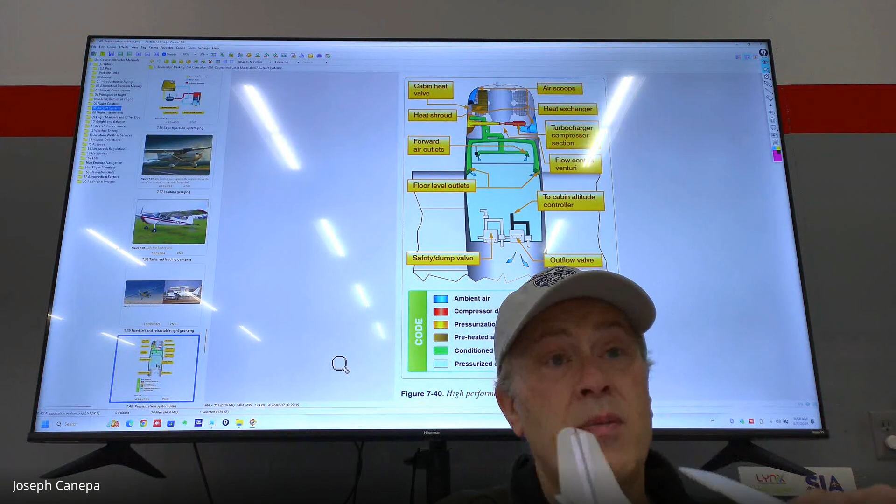Let's talk about aircraft pressurization systems. This is on page 735. We pressurize aircraft cabins because -- anybody know why we would have to pressurize an aircraft cabin? Yeah, do you know about what that level is? Yeah, it's around 13,000 feet, somewhere in that area. You really want to provide oxygen at about 15,000 feet. And in that case, if you can pressurize the aircraft, that would solve that issue there.

But pressurization systems, basically what they do is, first off, the aircraft cabin itself has to be completely sealed up, so there can't be any leaks in it. That's one thing about a pressurized aircraft. Second, you have to have some way of pressurizing or adding air pressure into that system, because when you're flying at 20,000 feet, all of the air in the cabin wants to escape, right? So we have to seal it off. We have to put pressure into it because we've got less out there.

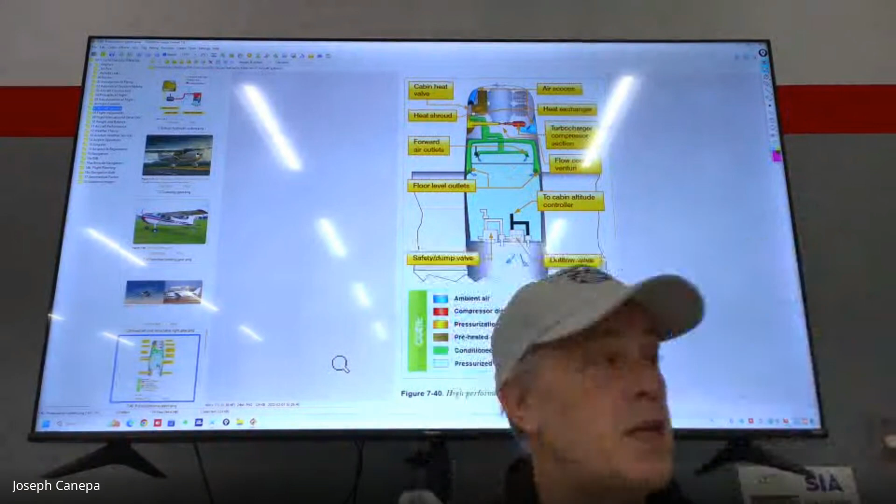Do we have high pressure on the aircraft at 20,000 feet or lower pressure? Yeah, it'd be much lower, right? So when you have lower pressure at that altitude, we need to pump lots of pressure in to make it feel in the aircraft like we're flying at maybe 8,000 or 10,000 feet, something like that. Most commercial airliners pressurize their cabins for around 8,000 to 10,000 feet, so when you go on a pressurized aircraft, you're going to feel that. For general aviation aircraft, they may allow you to pressurize it up to as high as 12,000 or so, but commercial airliners are all around that 8,000 to 10,000 feet.

So they've got just a couple of these, and I don't know if you're going to see much of this on the test, but I do want to go over it.

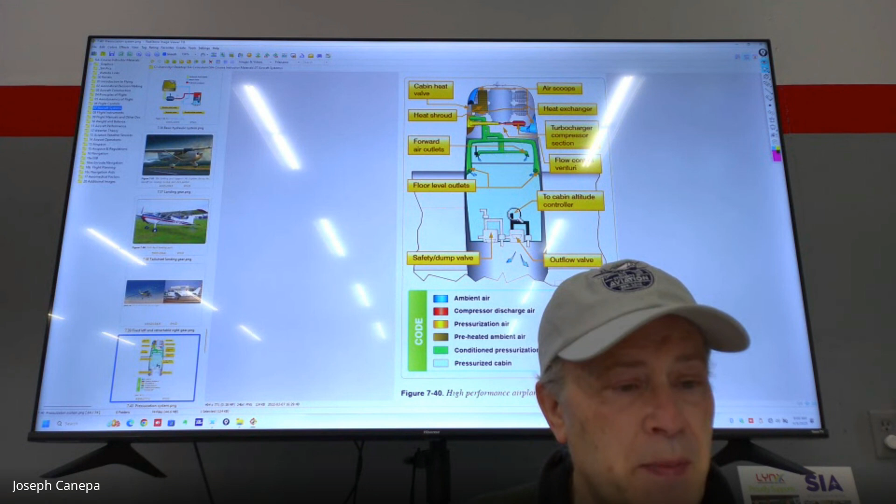Ambient air is the outside air pressure, the pressure around the outside of the aircraft. And then you've got your pressurized cabin, again like a capsule sealed. You've got a controller that allows you to meter the amount of air blowing in from a unit in the engine housing that basically pressurizes the cabin, typically off a turbocharger or something like that. It pumps air into the cabin to pressurize it, and then you'll have safety dump valves and outflow valves that regulate the amount of pressure.

So typically what you're going to see, I think they've got a diagram here. Let me just see if I can find it. Yeah, here we go, this is it right here. You can set the rate of climb of the pressure inside the cabin. Usually there's a setting, you can set it for 500 feet per minute. We know what a vertical speed indicator is, right? We've all seen that, and that just tells us the rate of climb.

Typically, most people are not going to notice a 500 foot per minute climb or descent, that's a pretty shallow climb. So in the cabin, when we set our pressure, we're going to probably set it between 500 and 1,000, so your ears can kind of adjust to it.

If you fly with a cold or have some sort of sinus infection, you're going to be much more susceptible to pressure changes. That's why you hear a lot of times when you're flying on the airlines, people saying, 'Oh, there's a baby next to me, and it was just bawling the whole time.' Well, babies haven't developed their sinuses well enough, and so for them it's like a balloon expanding as they go into an aircraft. Sometimes if they're congested, it'll just expand and cause pain, and they might cry.

So if you do hear a baby crying, one of the things you can tell them to do, if it's a young child—and a lot of young children have this too—is to pull their face back like this or tug on their ears like that. That can kind of loosen up some of the sinus cavities and allow it to equalize the pressure. Usually after 10, 15, 20 minutes the pressure subsides because some of that air leaks out of their sinuses. It's not so bad, but it is painful.

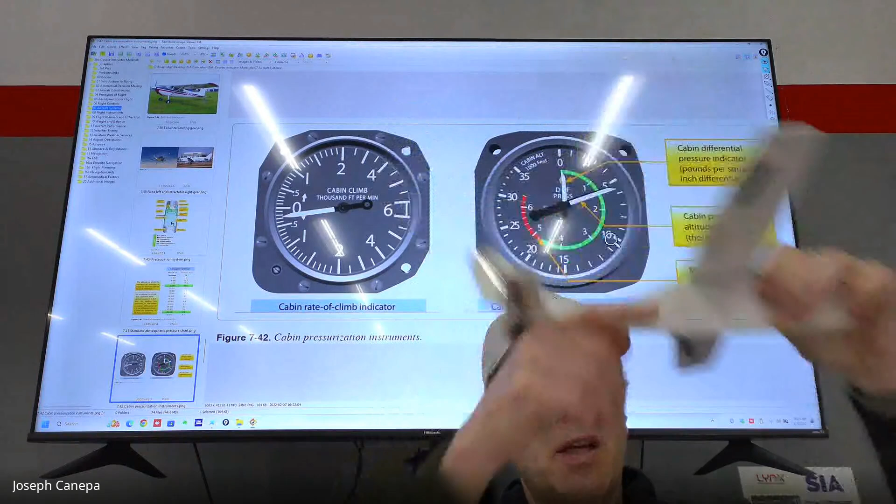So the differential pressure max that this aircraft can handle is around 4.8, so 4,800. That little dial, that needle right there, is just going to move and tell you the differential. So we really can't take this much beyond that, and that has to do with the aircraft.

Now, oxygen systems take oxygen from typically an oxygen tank, and they deliver it to the pilot through either a nose cannula or a mask or something like that. So this would be an oxygen flow regulator or whatever, and you could turn these on, activate them.

This would be useful up to maybe like 26,000 feet. Much beyond that, you really need to have forced air into your lungs, because your lungs aren't strong enough to draw in oxygen, even though it's being supplied to you. You can't inhale because there's just not enough strength in your lungs to draw it in. So it has to be forced in.

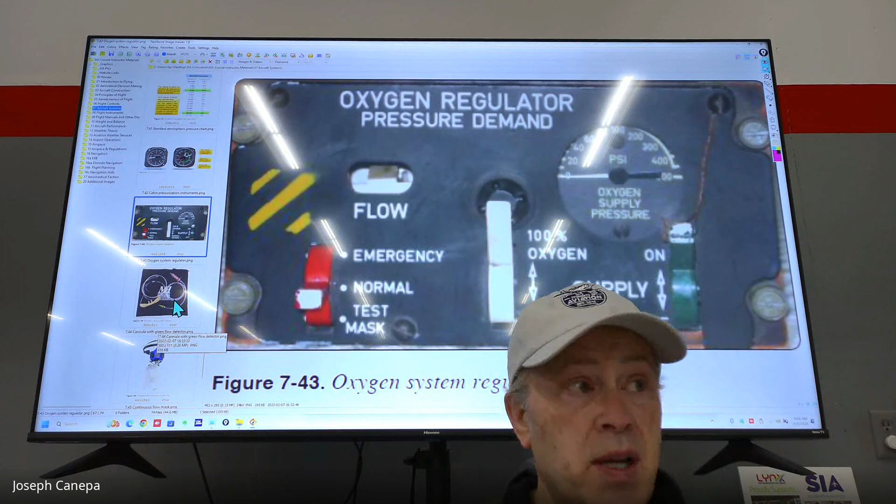We just breathe in. But a good point to make here is that the higher you fly, the less oxygen is available, right? It's just harder. You're not getting the oxygen into your system. There may be oxygen up there, but you're not getting it into your system because you're not breathing in deep enough.

So you really notice it at night. If you take a hit of oxygen at night, you'll notice right off the bat that everything becomes brighter. Oxygen affects our performance, it also affects our thought processes, things like our brain. Our brain doesn't have enough oxygen to operate at higher altitude. But at night you can really notice it when you take that hit of oxygen. You'll actually see everything just brighten up instantly, because the oxygen is getting into your bloodstream, it's getting to your eyes, and everything's performing a little better.

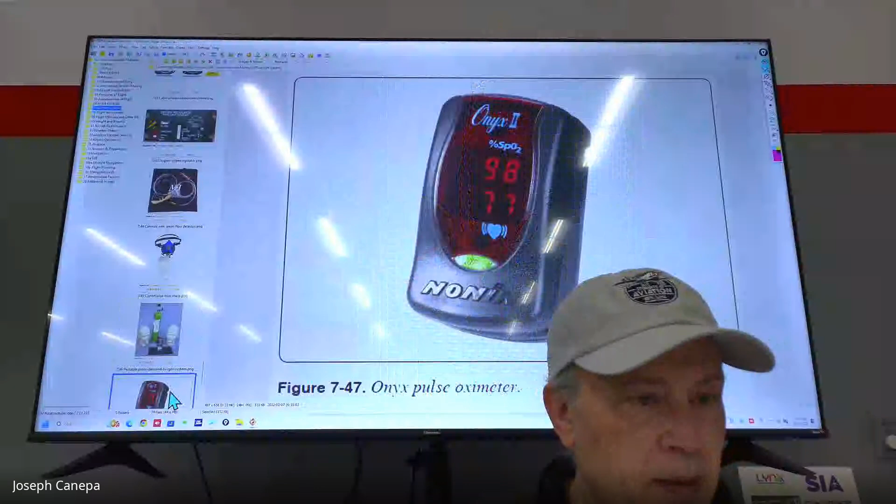It's a pulse oximeter. This just tells you how much your O2 is in your blood. These are dirt cheap, you can get them for like $10. Not a bad idea to have one of these in the aircraft.

What this is telling you is the oxygen in your blood. Right here, you've got the rating like 98, which is pretty good. If you get down to around 94, you're starting to get less oxygen. You can actually wear them on your finger, take it up to altitude, and actually see the oxygen drop in your bloodstream. It'll actually drop while you're flying, and then that's your heart rate right there. So again, that's a good thing to have.

There's several things we get into when we talk about aeromedical factors, we talk about this a bit more with carbon monoxide, how that prevents oxygen from getting into your system. As human beings we need oxygen to function, and there are several things that could prevent us from getting oxygen. One of them is carbon monoxide, another is not having enough air pressure or enough oxygen in the air. Those are all things that affect how we get oxygen in our system. If we don't have enough, we don't perform as well, we make poor decisions and things like that.

Okay, any questions on that?

So icing, types of de-icing systems here. There are several different types. I think we're going to page 7-40. You've got, this is a type of de-icing. So let's talk a little bit about the terms first. You've got anti-icing systems and you've got de-icing systems. Does anybody know the difference between de-icing and anti-icing?

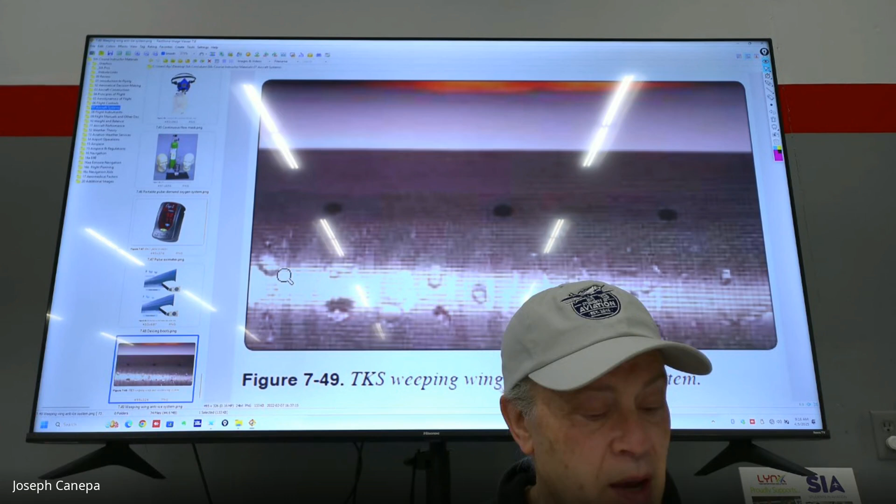They'll show frozen turkeys, or chickens or something like that. They fire them at a real high rate of speed into the turning turbines, and the turbines just slice them off. But they have to do that because obviously there are going to be bird strikes, and bird strikes can be devastating.

I think the Miracle on the Hudson, you guys remember that incident? That was a case where both engines were struck by birds, and they couldn't restart the engines in time, so they landed safely.

In those destructive tests, they have to make sure the casing contains the blades in there. Older aircraft didn't have some of those protections.

There was an incident, I don't know how many years ago, where a fan blade caused the engine to fail, and one of the turbine blades slung off the jet engine and punctured the fuselage, causing explosive decompression. I think a passenger was killed - they got sucked out or something like that. So yeah, it does happen.

With the newer engines now, they've got incredibly strong material around the engine. They've got these massive... I can't remember the name of the company. I think it was a European company that makes a gigantic engine. Gosh, I can't remember. What's that?

Rolls-Royce, that's it. They actually purposely let the fan blades, these large fan blades, depart from the hub itself, and the engine will destroy itself, but it'll keep it contained in the engine, just blow all the parts inside. So yeah, they're very strong, but it is a potential problem.

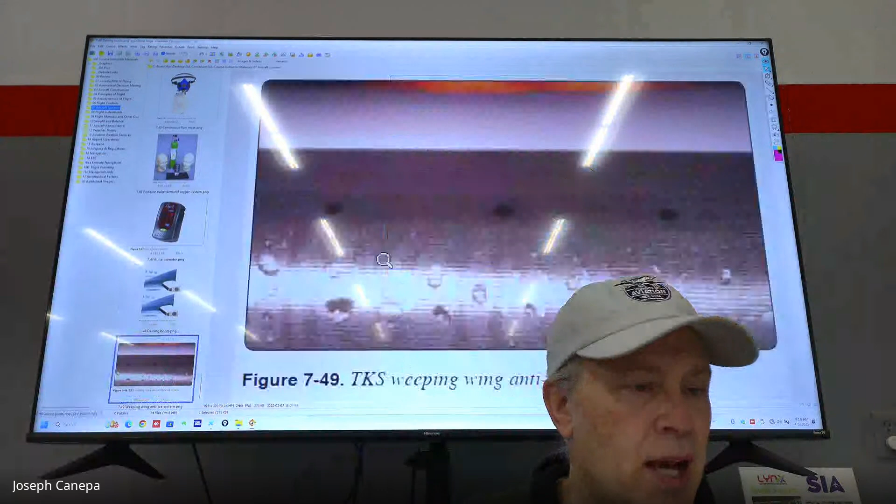You'll see this in a lot of smaller aircraft, like the Cirrus SR-22 has this. I don't know if it's an option or included with the aircraft, but you can turn these on and adjust the flow rate of the fluid.

Would this be a de-ice or anti-ice system? Anti-ice, yeah. That's also somewhat like the rest of it - that's another benefit. As it weeps out, it actually flows back across the wing. Its main purpose is really to prevent ice from forming.

There's pros and cons to each of these de-icing or anti-icing systems. The typical pros and cons for a bladder type system, where you turn on a pump and it inflates like this.

What can happen, and I don't know how much proof there is of this, but if you get ice that forms here and you turn it on, it may just push the ice far enough away from the wing but may not break off. That typically happens if you've got a very small layer of ice - it still stays attached to the leading edge, and then your icing system becomes useless because the rest of the ice is just going to form on there.

Again, I don't know how much proof exists of that, but it is a potential problem. These are also very high maintenance.

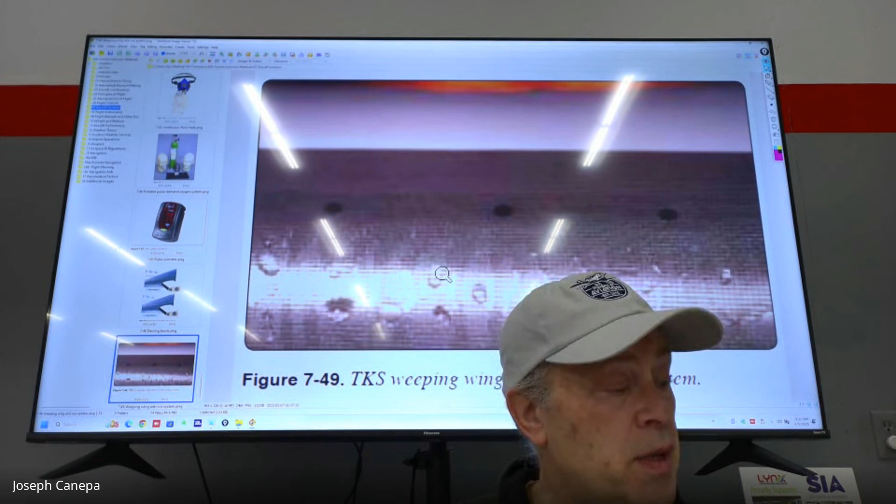The bottom line is, if you go up and fly and you don't have any kind of de-icing or anti-icing system, you need to stay away from ice. In weather reports, we'll find out if there's potential icing up at altitude, and if there is, it's a simple decision: you're not flying. It's very simple, you just don't fly if you don't have de-icing equipment. If you have de-icing equipment, it has to be certified to fly in those conditions that you're flying in.

So let's say it's light icing, like rime ice, which is kind of milky ice, and it isn't as bad as clear ice. Clear ice is literally that - it's just a solid layer of ice that forms. If there's clear ice up there, it forms fast and it's also very heavy. So if you have de-icing boots, you probably are not going to want to fly in clear ice unless you've got some sort of heated wings.

Jets have got it great because they duct heat from the jet engines to the leading edge of the wings, and it just blows out air and keeps the wings free from ice. They've got the best, but even those can be overwhelmed from time to time if you have extreme icing.

So, for the icing boots, why don't they inflate periodically? They can, yeah - on some systems they're automatic. They automatically will inflate periodically, they'll just inflate on their own. Most of the time, the pilot controls it - they hit a button and it cycles the boots. But on some systems you can set them up so that they do that automatically.

Another type of de-icing or anti-icing is the prop, and this is what's called a heated prop. Basically it's just a strip of rubber, and inside that rubber there's a bunch of heating elements. You can see here this is just at the root of the prop itself. We want to prevent ice from forming down here because, for one thing, there's a lot larger surface area there, so more area for the ice to stick to.

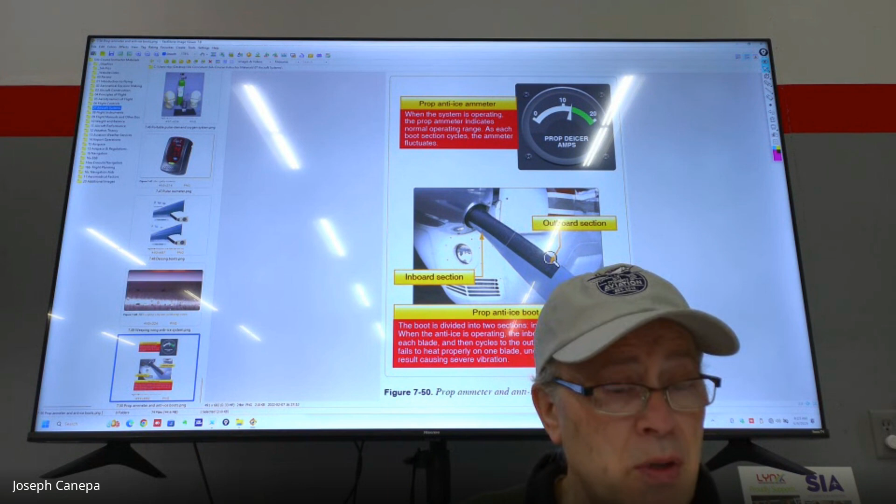As that ice breaks off, it kind of slings off the side, and it'll keep most of the ice off here. It's really hard for ice to form on this. It can form on the thinner portion of the blade, but that thick portion is really susceptible to ice, and that's why we have these little boots that cover the root portion of the prop. There's the root there, and this extends out to the prop itself. But these obviously are driven by your electrical system, so you have to have a really good alternator or generator to generate the amount of current to heat those elements.

Would the same force of the propeller just launch the ice off the blades? Not necessarily. I mean, if it's like clear ice, once it hits that, it's stuck to it really hard. Even rime ice can form on it - it's not as likely, but clear ice is very dangerous. And you can imagine this blade is turning at a pretty high speed, close to the speed of sound on the tips. So in a situation like that, you really don't have a lot of options. Having that heated blade is going to heat the blade further over, but it's really designed to get the ice off of that lower portion.

Follow up to that - if the heated part melts the ice, would that come off and hit the stuff towards the fuselage? So the question is, if you turn this on, what happens to the ice - does it sling off, does it hit the aircraft? The answer is it can hit the aircraft. I was flying on a twin a number of years ago, and we had some ice develop on one of the tips of the props. In a twin engine, the engines are right here and right here. Well, when that ice slings off those props, where is it going to hit? It's going to hit the fuselage, yeah.

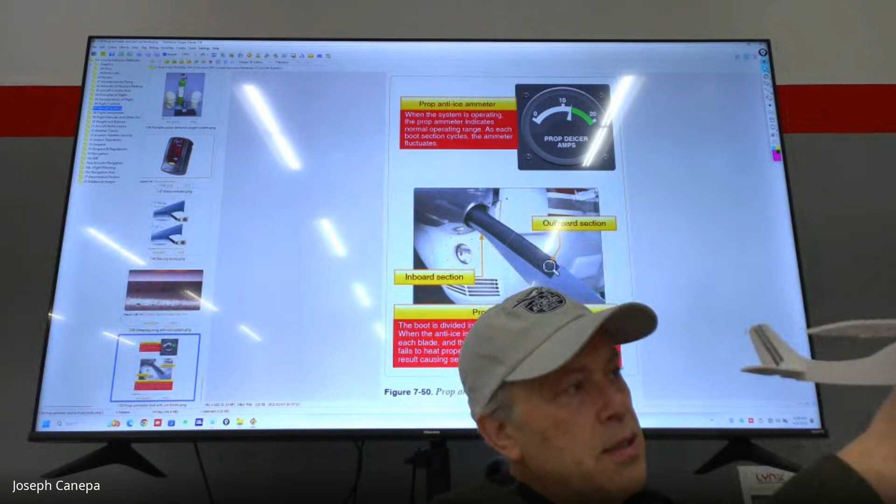Otherwise, on any twin, look roughly where the line of the prop is, the plane of rotation, and look at the fuselage. You'll actually see dents there if that aircraft has ever been in an icing situation, from the ice slinging off.

The question was, if you didn't have de-icing systems, can you get ice off the aircraft by shaking it? The answer is probably never. It's only possible if it's just about ready to fall off anyway. Keep in mind an aircraft traveling through the air at 100 miles an hour has a lot of pressure on the ice, and if it doesn't fall off at that speed, shaking the plane won't do it either. What may help is trying a side slip or forward slip.

I wouldn't recommend it, but you can try a side slip or forward slip and see if you can change the airflow, maybe pop some of the ice off. But if you're in that situation, it means you didn't plan enough ahead of time to stay out of the ice. If you're flying with someone else who made the poor decision to fly into ice and you don't have de-icing equipment, you can try anything at that point.

The general rule of thumb is if you get into ice, you need to either climb or descend by 4,000 feet. That will generally get you out of icing conditions, not always, but if you're at high altitude and can descend, you're descending into warmer air typically. The closer you get to the Earth, the warmer it is; the higher you go, less pressure, colder. That's just standard the way it works.

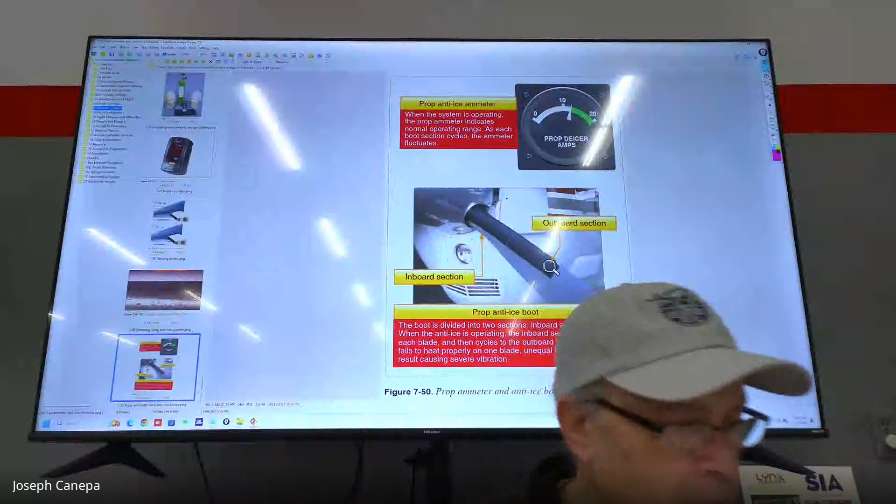Okay, any other questions on that? All right, let's move on to flight instruments. Let's see what we have for time here, okay, 9:30. All right, flight instruments. I think we've kind of reviewed some of this stuff already.

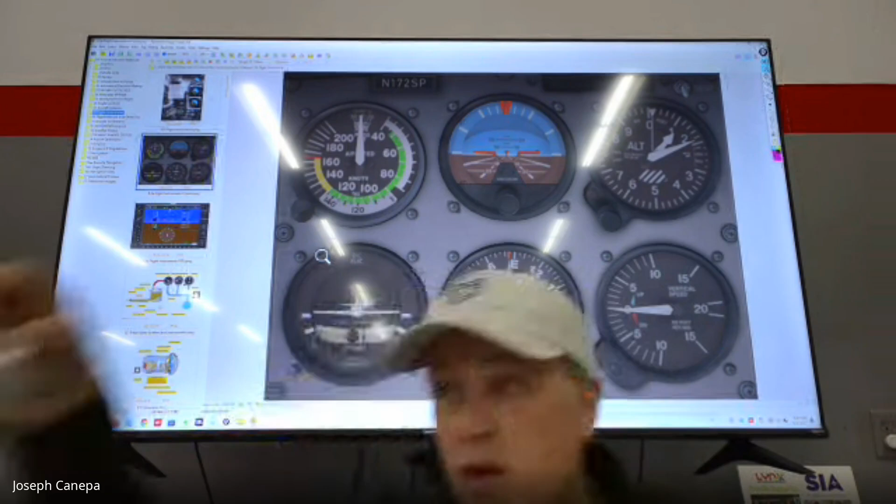It's beyond the scope of what you need to learn here. If you want to delve into gyroscopes, there's some really good videos on it. I don't know all the characteristics other than to tell you that if you spin it really fast, it wants to stay at that position. It really resists moving out of it. It's not just going to tip over. It stays up, just like those toy tops you had as a kid, that's how they function. You spin it and they stay upright. Then over time, due to friction, they'll start wobbling, caused by friction and precession.

So there's actually a car called the Gyro X that is on two wheels and uses a large gyroscope to keep it steady. And those walking things, the Segways, you guys ever seen those? Those use gyroscopes, and they're just two wheels. Hoverboards probably use gyroscopes too.

The more weight you have on a spinning gyroscope, the more stable it is. There's a design for a monowheel with two gyroscopes that would rotate, probably going against the turn, one side or the other. I think I've seen some of those monorails, basically two wheels on a rail with massive gyroscopes. The heavier the gyroscope, the more stable it's going to be. The faster a gyroscope spins, the more stable it's going to be as well.

This gets into areas that we don't need to discuss here, but if you want to delve into it, again, there are a lot of good YouTube videos.

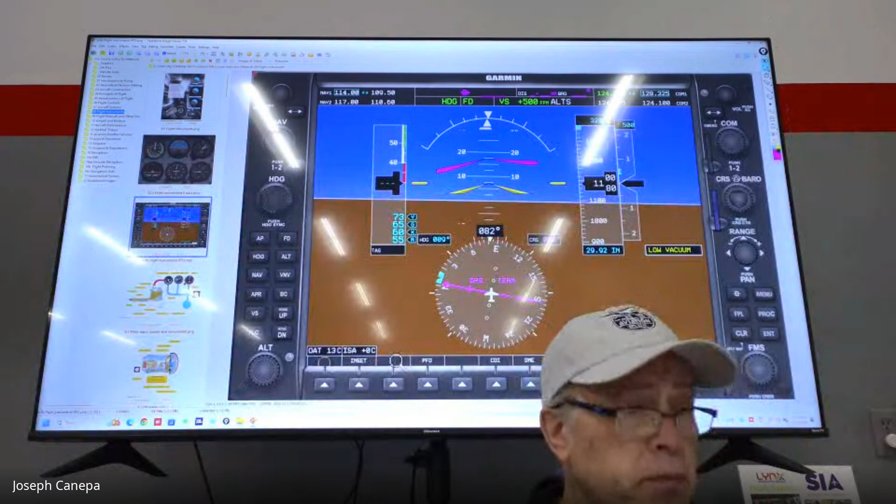All right, so let's talk about what drives those systems. So they both have the same inputs. They have static and dynamic air pressure that go into these. They may or may not have... we'll stay with that. So we've got the static and dynamic pressure that's pumped into the system, or actually brought into the system.

On aircraft, we have what's called, they're all going to have what's called a pitot tube. So let me just, let's see if I can do it. For example, let's make this.

So I don't know if I can, I'll try it like this. So right here, I'm just going to hold this like this, and I'm just going to blow on that. Watch what happens to that. Okay, that's a very simple airspeed indicator. If I blow on it for a long enough period of time, this will just stay up. So let's do it right here.

And you can see how it kind of pushed out like this as I blew on it. If you're flying through the air, this is obviously going to push back. If I'm going this direction right here, this is going to push back like this. And we kind of have a gauge. We can put like a sheet of paper behind it with graduations on it, and we have a rudimentary airspeed indicator. So this is dynamic pressure.

Again, this pitot tube is what captures the air. So what's happening here? This is pointed into the flight path right here, or on the leading edge of the wing. Let's see what here. I think, well, actually, let's go to our simulator here. This one.

We'll just go on the outside of the plane here and look at this. Is this a new simulator? I know this is X-Plane 12. It is the latest version of X-Plane 12, though.

Is this one on the other simulators? We use X-Plane 11 on the SIA sims. The big one in our office, the SIA office, is X-Plane 12. And yes, it's not as good as Microsoft Flight Simulator as far as graphics.

So I bet you we're floating. Let's see if I can take off here. Brakes. Yeah, I'm at full power. We're in the water here, so this is going to be interesting. There we go. Oh, maybe it is a float plane. I just want to get up in the air. Okay, so let's.

So it's in demo mode because I don't have an internet connection on here. If I had an internet connection, I could do this. Let's do this. And that one doesn't have, try this one again. Launches. Choose location here. Launch a passenger.

There's also what's known as an alternate static source. That might be something inside the aircraft, and it could be something as simple as, let's say you lose your static port and it becomes iced over, or a bug gets in there. It'd be unlikely in flight, but on the ground, dauber wasps sometimes will nest in those little holes - it's a perfect hole for a nest for them, and they'll cover that up. You should catch that during your pre-flight inspection. It's so important that it's on every checklist to check the static port and make sure that it's open.

But if that does get plugged up in flight, you can do another thing here - you could just break the glass on one of these instruments. You want to probably break the glass on the cheapest instrument. The altimeter, I would not want to break the glass on that one - it's very expensive, you're talking thousands of dollars for a good altimeter. The vertical speed indicator you can get for much less expensive than that. So if this got iced over and I was really in a dire situation, in the clouds, in ice, a situation I should not have gotten myself into, I would break the glass here, and now we've got static air pressure.

You're letting in just the atmospheric pressure. This will only work on a non-pressurized aircraft though. If you're in a pressurized aircraft, that's not going to do you any good, because the pressure in the aircraft is going to be different - it won't change it. So for small planes like this and that one behind us over there, those single engine general aviation airplanes, that would work.

Yeah, Danny. Sorry. Say it again.

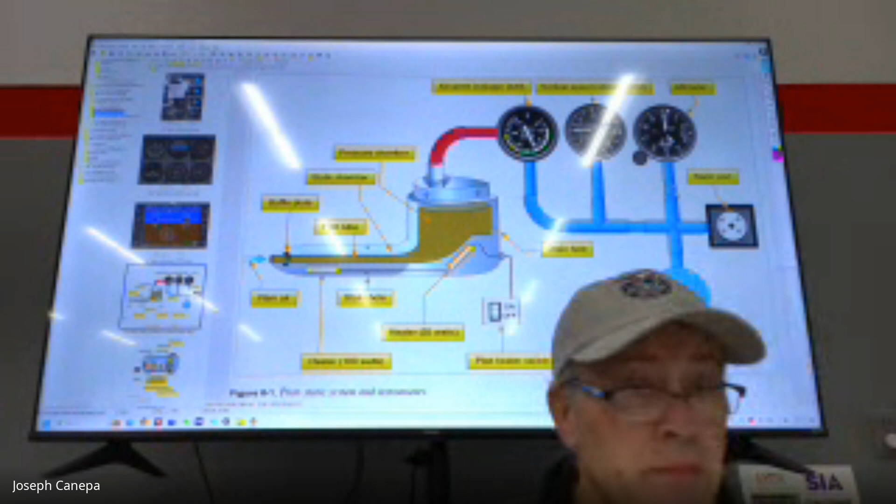Could that cause the static port to unclog due to the pressure? Well, you shouldn't have to, but I see what you're getting at, and it is possible that it could pop it out. It would be, because especially if you're in a pressurized aircraft, if you broke that, the pressure in the aircraft would try to escape through that static port if it's plumbed that way.

But it may not be plumbed - it may be an electronic instrument. Like most aircraft today, you can't, obviously with a TAA aircraft like this one, you can't break the screen, and that would be very expensive - we're talking tens of thousands of dollars. This only works for the older style gauges. So again, there's our vertical speed indicator - I would crack that glass if I had to. This probably won't be on the test, so we'll just move on here.

So this little piece is like a little plate, maybe an inch and a half in diameter, with a hole in the center of it. You can look on the aircraft - if you go out to the flight line, you'll see the port on some of these airplanes, you'll have to look for them. They typically look very similar to this right here, just this little thing that looks like a quarter with a little hole in the center of it. But they've got a strong plate around them.

That's a heater, and what that does is it heats up and melts off any ice or anything like that. When you get into icing conditions, you'll turn that on, and that'll prevent ice from forming in the system there.

Let's say you're in a really old aircraft and get stuck in icing conditions again, which you should never do, but something bizarre happens. Why don't planes have multiple static ports? Some of them do - airliners have at least 2, maybe 3 or 4 on the aircraft, and they'll have alternate static sources too. But most of the time general aviation will typically have just one static port.

Okay, the pitot heater - that's going to heat this tube right here. Again, ice can form on that tube, so you've got little heater elements. You turn this switch on and it warms that pitot tube up. It's so important that it's in every checklist - you have to turn on the pitot heater, and if you put your hand on that pitot tube, it gets really hot. You'll burn your hand on it if you're not careful.

In some aircraft, if you leave that on the ground on a warmer day, like over 40 or 50 degrees, you'll actually burn the heater out. So that's how strong they are - they're very powerful.

So let's see - yep, ram air, pitot heater switch. I think that's everything there.

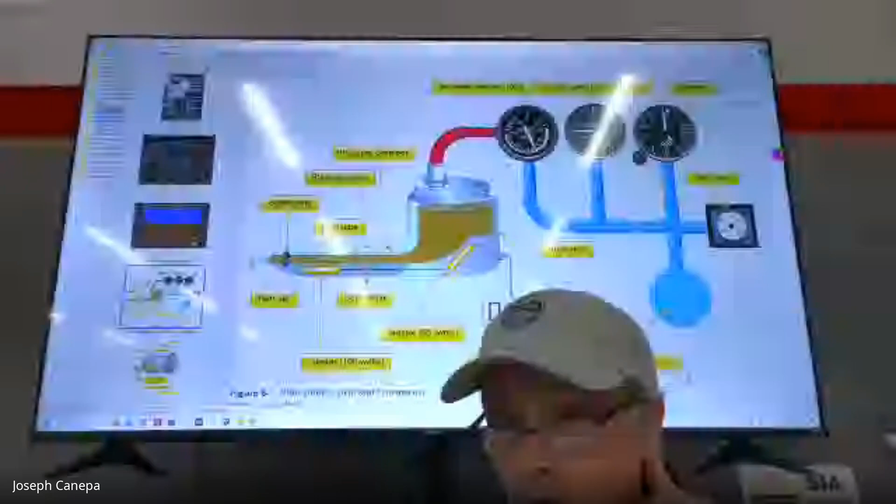So what's that - the drain hose? Yes, so the drain hole is there just to drain out water that gets into the pitot port. So if you get some ice in here, you turn on the pitot heat, it's going to melt the ice, and that's going to get sucked out from these static holes. If that gets blocked up, then your airspeed indicator is not going to show anything essentially.

Altimeter - so we go back to here's our diagram. There's our altimeter right there. It's driven off this blue stuff, which is all the static, what drives the static port. Notice that the airspeed indicator has both static air and dynamic, or ram pressure air, going to it, whereas vertical speed and altimeter have just static.

You will see that on the test - they're going to ask you about this. So static air pressure goes to just those two instruments, but ram air is going to the airspeed indicator too. So pitot feeds the airspeed indicator, and static feeds the airspeed indicator. These others are just static air pressure.

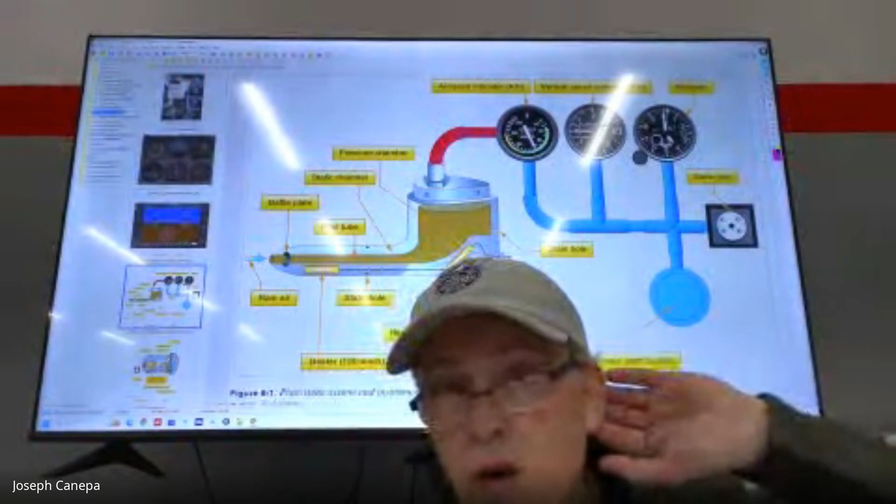No, they wouldn't be connected to a system at all. Yeah, and that would be you're thinking about the gyroscope, the vacuum gyroscopes. The vacuum systems typically drive the gyroscopes, they won't drive any of the flight instruments. These right here are strictly used outside - they use very little electricity, if any, other than for lighting and stuff like that.

Obviously on a TAA aircraft, these are going to be driven with little sensors, but they'll display that information on top. Okay, so let's go here - let's take a look at the inside of an altimeter. So the altimeter is, again, a very basic design.

These are aneroid wafers right here, and basically they're like a balloon, but a very sturdy balloon. It's sealed air - as the outside air pressure decreases, what do you think happens to the aneroid wafers? They're going to expand. Yeah, exactly. And as the air pressure increases, they're going to contract.

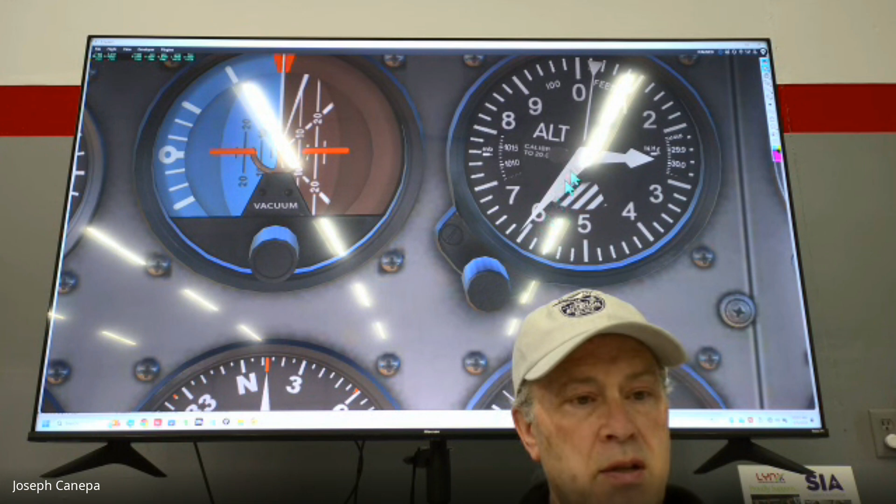Now, this right here is for 10,000 feet. So if we were at 12,600, where would this little needle be? What do you think? It'd be just past the 1. Yeah, because it's 10,000s. So again, this is hundreds of feet, thousands of feet, 10,000s of feet.

You will see this on a test as well. They're going to give you various altimeter diagrams and ask you what this altimeter is showing. One of them shows this over 10,000 feet, and the common mistake most pilots make when they take the test is they say 2,600 when really it's 12,600. So don't make that mistake, make sure you know how to read an altimeter.

Is there any aircraft out there with 100,000 feet? Unless it's a spacecraft, maybe the SR-71. It's possible. Again, for general aviation aircraft, it's not relevant. You're going to see this type of altimeter, this is the most common type you'll see in an aircraft.

Except general aviation aircraft, the vast majority of them are not. Small aircraft are typically going to stay below 10,000, but all of the general aviation planes I've ever flown are capable of flying over 10,000 feet. Is it practical? Probably not, because it's going to take forever to get up there. If you're doing a long cross-country flight, there may be benefits to climbing to that altitude. So it is possible that you'd go up there.

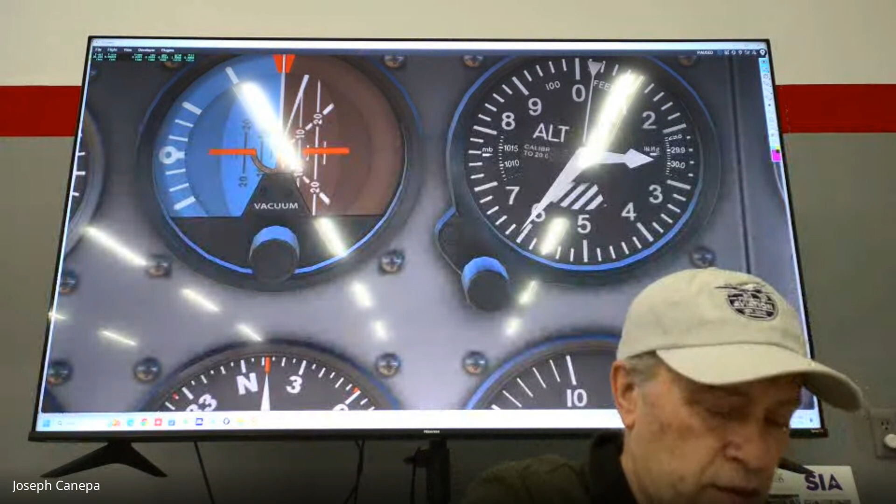If you can hold on, just keep right next to it, don't pull on too much, the cable is just gonna... When I tell you, I'll actually turn that power switch off. Okay, turn it off. All right, there you go. And actually, try not to touch the thing there. You can actually feel it, see the force of it? You can actually feel it. Don't let that drop, that's very expensive.

Yeah, be super careful with that, like I said, it was very expensive. And you can feel the force of it right there, it's resisting that change in direction.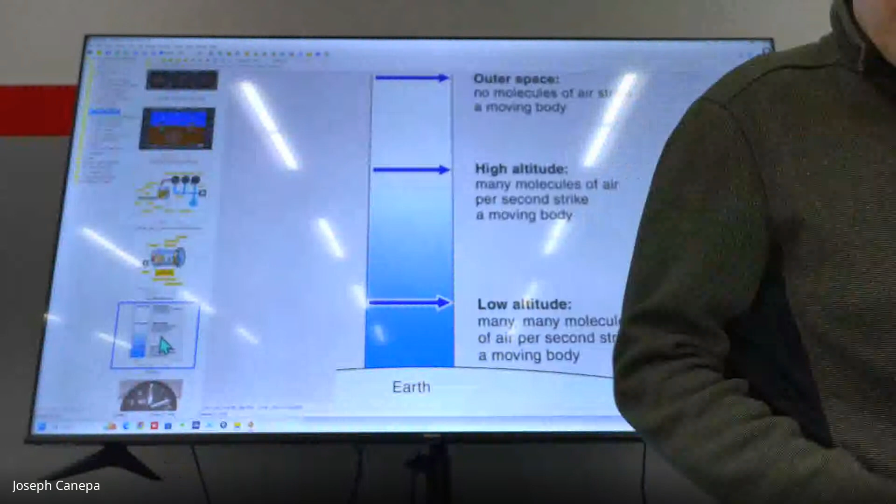Oh, I know. Yeah, but that's going to change here momentarily. Okay, for you people at home, I do apologize for that. I wasn't able to get the phone set up.

Is that the AP or the APU, no the other one? Static, you know. No, static, on the outside, like the generator. Is that noise? Yeah, it's a GPU, ground power unit. Absolutely, yeah.

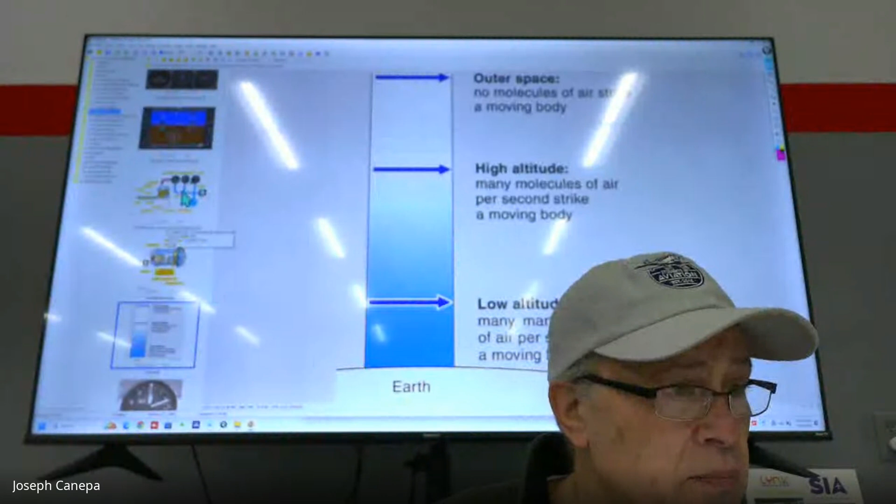So there is some... The altimeter obviously works based on ambient air pressure, right? Okay, so obviously in outer space there is no pressure because there's no air molecules up there. At high altitude, it's thinner, there's some molecules there. And then at low altitude, the air is much denser, you're going to have more air pressure out there. So that affects how the pitot-static system works.

So we know that the static port is going to detect that. Obviously it's going to show it in the altimeter and the vertical speed indicator. But the airspeed indicator, because there's less pressure in there, or the air is less dense at higher altitude, it's going to read slightly lower. So the higher we go, the lower the airspeed is going to read. Does that make sense? Again, the air is less dense.

If those aircraft may be flying at 100 knots true - not ground speed. There's a difference between ground speed and airspeed. There's different types of airspeed, there's calibrated, we'll get into that here in a second. But if the aircraft is flying at, let's say, a true speed, the indicated airspeed might be much lower. Say like 90 or 80 knots, depending on how high you are. Again, it has to do with the density of the air.

And that's one of those drawbacks with it. All these instruments do a pretty good job of representing the information we need to see in the system, but they do have their drawbacks, and for the airspeed indicator, that's one of them. So you have indicated airspeed, which is what the pitot tube is actually reading, and you have true airspeed, which is your real airspeed at altitude. So the closer to the ground you are, the closer to true airspeed you're going to read.

So if wind was pushing you, could you increase your airspeed reading? It could, but it would have to be really strong wind - you'd have to be doing like 40 knots or so. But you'd probably see the airspeed indicator move around a little bit if it was blowing right into the pitot tube. Yeah.

To make sure it's right, or take off lower - I don't recommend it, but it's something you could do to test it. Mechanics and A&Ps with inspection authorization have equipment to check - avionics technicians would probably have the equipment to check your pitot-static system, and they actually do that. They have a device that applies pressure on the pitot port, and they measure to see if there's any leakages anywhere that might cause deviations and inaccurate readings. That's actually required to be done for aircraft flown in IFR conditions. For VFR aircraft it's not required, but for IFR aircraft you have to have a pitot-static check every 2 years. And that may actually do what you're saying there, yeah.

My book doesn't have an on switch shown for that. This right here? Yeah, it's just model-specific - depending on the book you have, it may or may not show it, but yeah, it is there on all aircraft. You may have a pitot system, keep in mind, that doesn't have a heater, so it may not. There's some aircraft that don't have pitot heaters.

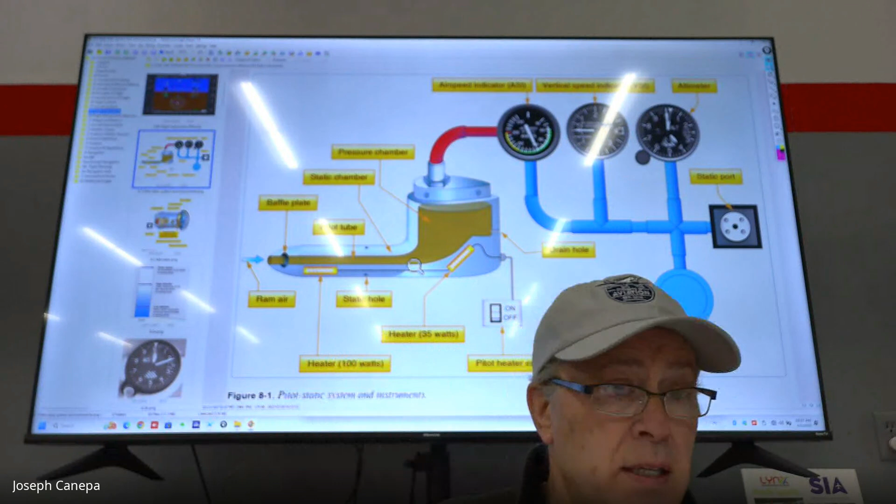In the back, usually they put it - yeah, they may have a pipe in the back or a little opening there to drain out. So, if you think of a pitot tube, all it is, is like a straw that's hanging out in the flight path at the leading edge of the wing. All it's designed to do is measure or capture that impact air. The faster we're moving, the more air that's moving through that tube, pushing on the dial on the airspeed indicator. Okay, if you have a high AOA...

Would your airspeed indicator read a lot lower? Good point. So the comment was, if you had a high angle of attack, is that going to affect the indicated airspeed? What do you guys think?

So here's our pitot tube. Let's say this represents our pitot tube, mounted right here on the aircraft. So the comment was, if you have a high angle of attack, is that going to affect the airspeed indicator reading? Let's take a look at it.

So here's our flight path right here. Our flight path is like this. This is not the flight path - this is the pitot tube I'm using right here. So if we have a high angle of attack like this, the pitot tube is pointing up like that. You think that would affect the airspeed indicator? Yeah, it definitely does.

It does matter, because again, we're not going up - the flight path of the aircraft is this way right here. So if I have a high angle of attack, this is probably beyond the critical angle of attack. But let's say we're flying like this. The pitot tube typically is parallel with the wing, the chord line of the wing.

Maybe it points down just a little bit, but typically it's parallel to the chord line. We know what the chord line is, right? So this is the pitot tube right here. Yeah, that angle right there does affect how much air gets in there, so it's going to be less. So the airspeed is, if it's like this, probably going to be indicating lower than our actual airspeed - because again, that's if we just use the pitot tube itself.

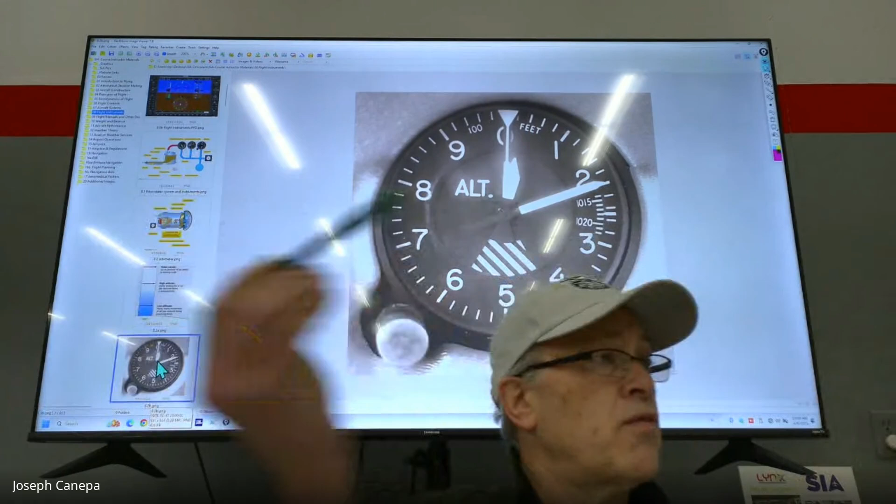If I hold this, let's say this is a pitot tube, it's just flying through the air like this - lots of air is going to get in through here, and it's going to show a higher indication. If I cant this a little bit at an angle and fly through the air, not as much air is going to get through. Even though the pitot tube is flying through the air at the same speed, it's at an angle, so it's not going to capture as much air.

Do they put little systems that'll keep it from angling up and going like that? Yeah, good point. So we actually just saw one on that - I think, well, maybe that one didn't have it.

Some of them do. So what they do is they put little vanes on the pitot tube - they'll actually have little wings on it, and whatever attitude the aircraft is in, pitch attitude, the pitot tube is always going to be pointing into the flight path. So it's actually like a free moving pitot tube. You'll see it on commercial airliners - they've got little wings, like a little vane on there. And as the attitude of the aircraft changes, the angle of attack or whatever changes, if the flight path is like this, that pitot tube is always going to be reading into the flight path. It could be perfect - yeah, good comment.

Yeah, good. All right.

Yeah, I know you're getting confused between the climb, which in this case our flight path is this way - and again, we'll just review that. What's the flight path here? Straight down. This flight path is what? I didn't give you a flight path - exactly, so we don't know what the flight path is. This one obviously is going back this way. So again, we use that term flight path - just remember that, that's a good concept to remember.

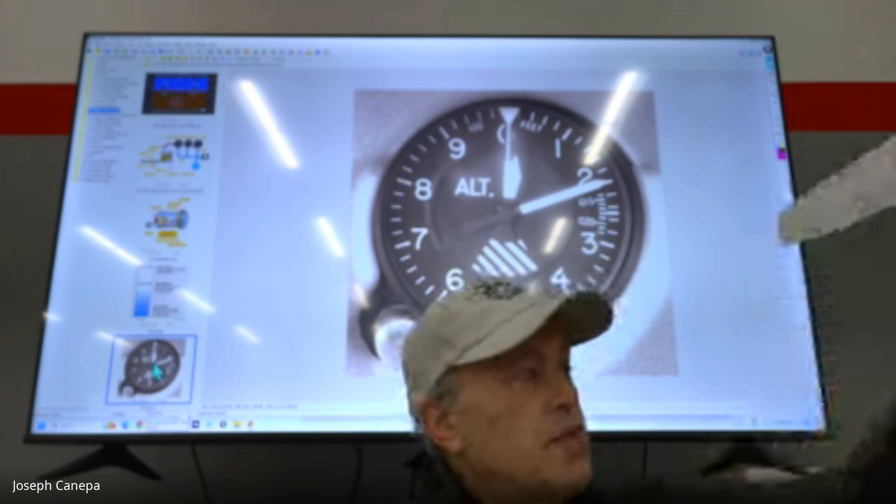You don't really have much control over just your rudder and elevator in a situation like that, because you've got thrust from the engine. Say the aircraft is on its edge—you've got plenty of thrust, and you'd have to have lots of thrust to hold the aircraft in the air, enough to counteract the weight of the airplane. You wouldn't have any control through the ailerons, very little if anything. Most of your control is through this, not because you've got air flowing from the flight path, because at this point there is no flight path. You're getting control of the aircraft because there is thrust on there.

All right, let's keep moving here, guys, so we don't fall behind.

Okay, let's talk—if you go to page 8-4, effect of non-standard pressure and temperature. That's going to affect how the altimeter reads. This gets back to some of the limitations of these gauges. If you don't have a computer calculating this for you, you have to figure it out on your own.

Let's say the aircraft is at 1,000 feet, and the outside ambient air pressure changes. Is the altimeter still going to read 1,000 feet if the outside air temperature changes? No, it's not. So how do we fix that?

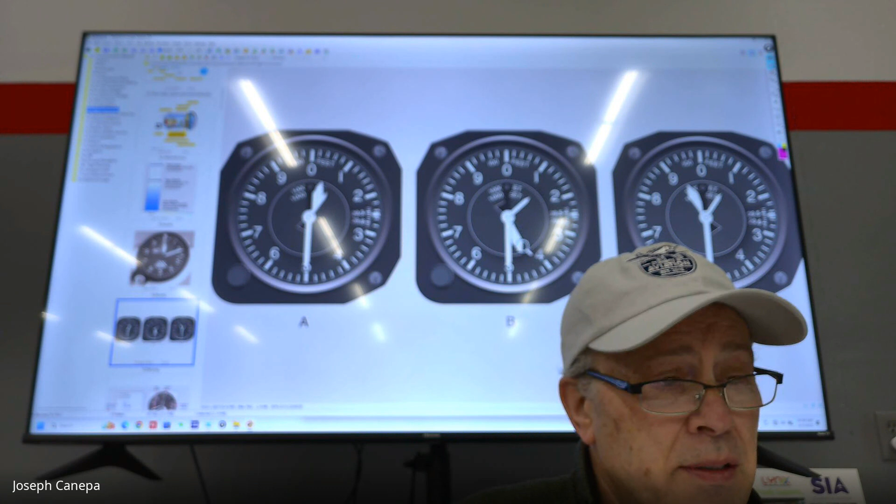I think this is an actual diagram from the test itself. This one right here is reading 10,000—it's between 10 and 20,000. And this one's just under 10,000, so that's the 10,000 feet needle, and this is the 1,000-foot needle. You'll see this on the test, and you'll have to know how to read these.

The whole point of going through this was to show you this Kollsman window, it's called the Kollsman window right here, and this little knob adjusts that setting.

Let's go to the simulator where we can simulate this a little more easily. Notice how our inches of mercury setting is changing as I turn this. Let's say the outside pressure is actually not adjusted—let me turn it back off here. I'm going to unpause this so it shows us what's going on, and turn on our setting indicator, and turn on our heading indicator and altitude hold. We don't have to worry about that.

So we're going from an area that has relatively high pressure right here, and it's indicating that we're at 5,000 feet right here. Let's see, make sure I'm reading this right. Yeah, okay, the reading here is inside the aircraft. The altimeter is showing 5,000 feet.

If we go to an area that is... let's see this here. Let's see if I can find another one. Well, let's do it by hand. I thought they had a diagram in here that actually showed this, but I don't see it anywhere.

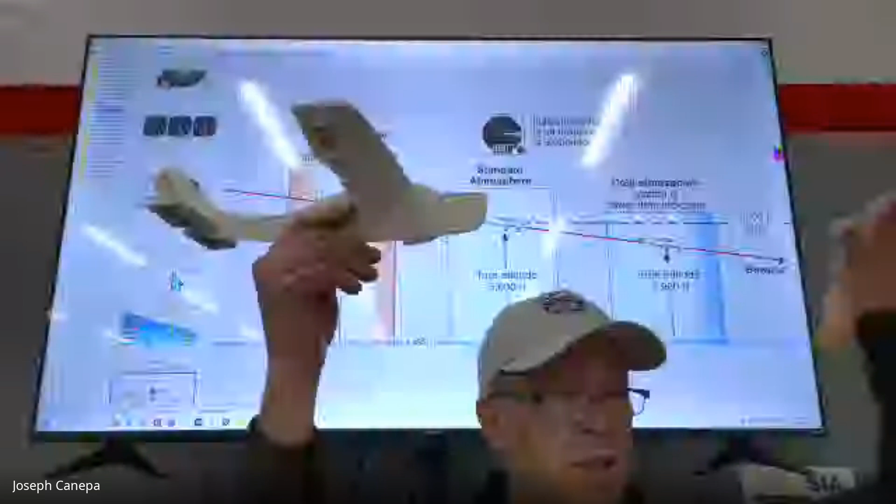All right, so let's say our altimeter is indicating 5,000 feet, and the outside air pressure, the ambient air pressure, is 30 inches. If we keep flying and stay at an indicated altitude of 5,000 feet, and we decide we actually fly into an area of low pressure, what altitude would we be at?

It's hard understanding this, so you have to think about it. We're at 30 inches of mercury for our barometer reading, at 5,000 feet right here. And we're heading into an area over here that is low pressure. So high pressure going into low pressure. If we stay at the altitude 5,000 feet, are we going to be higher here or lower here? This is a tough one.

You're saying lower pressure, all right, so it's low pressure. So what is that going to do? Let's say we fly into this, and I'm holding the plane up, and I'm keeping it 5,000 feet above the ground. So 5,000 feet above the ground, and I move from an area of high pressure to an area of low pressure. What's that do to our altimeter? Donnie?

I know it's confusing. Again, I'm holding it in the pole, and I'm holding it at 5,000 feet, keeping it at 5,000 feet above sea level, and I'm just moving from an area of high pressure to an area of low pressure. And the altimeter should show higher. Okay, it should say it's higher.

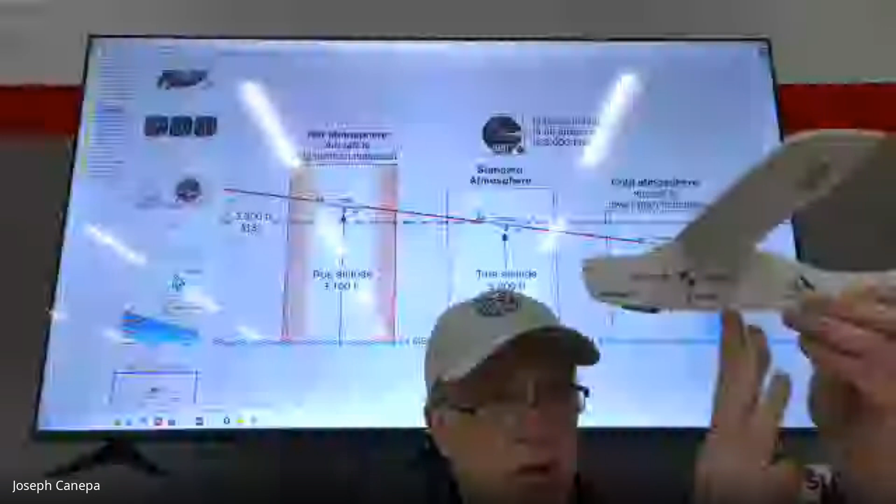That means that you're actually lower than what your altimeter is currently reading. And it's just the opposite if you're flying from low pressure to high pressure. If you're going from low pressure to high pressure, you're going to have to climb to maintain the same indicated altitude, not actual altitude. Does that kind of make sense? Again, it hurts the brain because there's so many things happening—you've got the changes in the altimeter and stuff like that.

So you have to think about the outside pressure. Just remember that as you climb, the air pressure decreases. What else changes the density of the air? We saw there's air pressure, but what else changes the density of the air? Temperature. Yeah, heat. Exactly. So let's talk about that.

There's a mnemonic or memory aid for that as well: from hot to cold, look out below. So let's say we're at 80 degrees temperature right here, and we're tethered to the ground at exactly 5,000 feet above sea level, and we move from an area of hot air to an area of cold air.

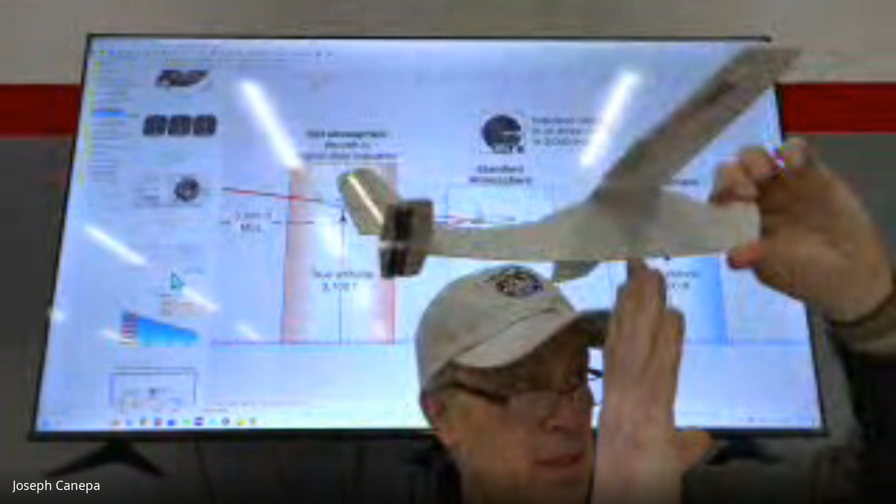What is our altimeter going to do? Hot air to cold air - yep, it's going to decrease, right? Because you're going from an area of relatively lower density air to an area of higher density air. So to maintain that same density of air, we'd have to descend a little bit. That's why hot air to cold air, look out below. High pressure to low pressure, look out below. Remember those two phrases, because that's going to help when you take the test.

Yeah, Tony. Whenever you have a... Yeah, you should always be.

No, all this stuff we're talking about, you don't have to worry about if you're constantly adjusting your Kollsman window, your pressure setting, when you're adjusting for non-standard pressure. You're now reading closer to true altitude, and when we say true altitude, we're talking about MSL, which stands for mean sea level, above sea level.

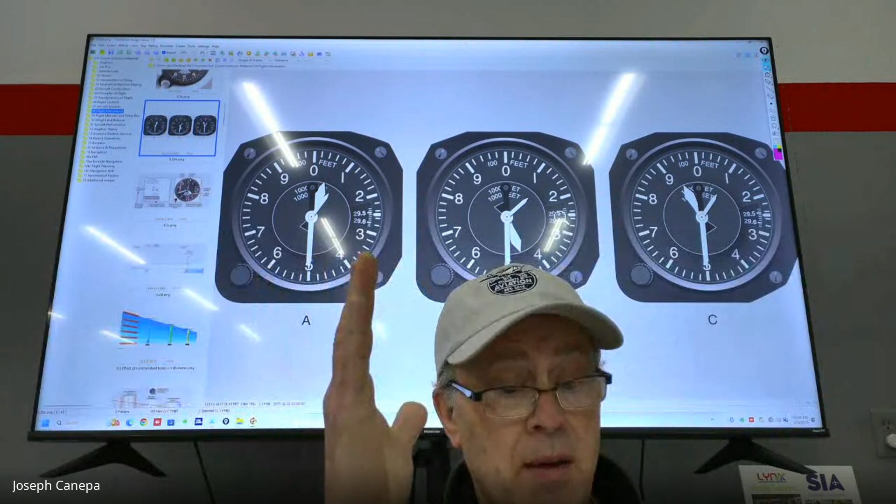MSL is basically your true altitude, which you're actually at above sea level, which may be different than how many feet you are above ground. If you're in a mountainous area with mountains around you that are 10,000 feet high, you may be at 10,000 feet MSL, but your AGL, which stands for above ground level, may only be a few hundred feet. In that case, it would be disastrous if you had the wrong altimeter setting.

When we say the term altimeter setting, that's what we're talking about - you're adjusting this knob, and it's changing your altimeter setting. Yep. Do you guys have some questions here?

That's why like that one canyon, Columbia River Gorge, you're talking about? I remember you saying like a Valley that was higher. Yes, in the mountains. Yeah. You have to be really careful when you're out there. Obviously weather is a concern, but it's a different type of flying when you're at higher altitude.

The plane moves through the air a lot faster because there's less air resistance. There's not as much air molecules hitting it, so it moves through the air faster. So the aircraft turns in a much wider arc. On that, I think we had a diagram here to show that.

Let's talk about the different types of altitude. There's the indicated altitude. Does anybody want to take a guess what indicated altitude is? What it says - yeah, what the altimeter says. When you hear the term indicated, it literally is referring to what is being indicated to you as the pilot.

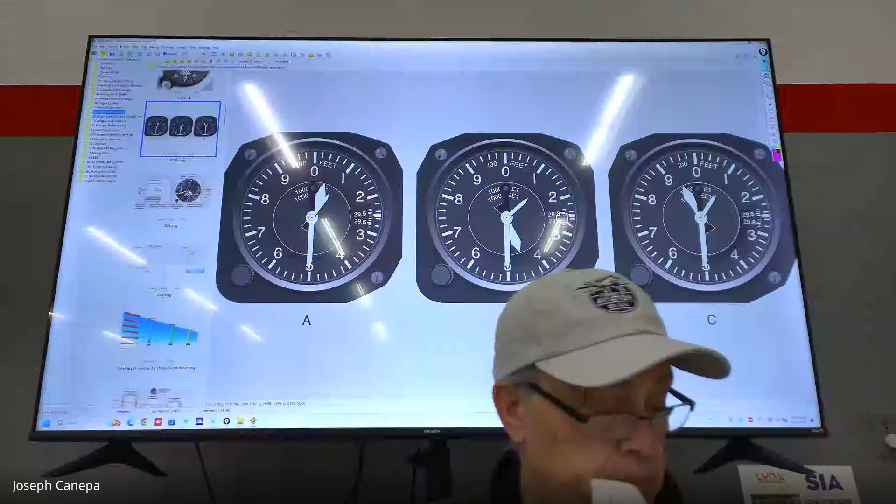So that's what you read off the dial, that's indicated. All right, what about true altitude? Try it without reading off the book. Yeah, your actual altitude above sea level. Yep. So it's the vertical distance of the aircraft above sea level.

So then absolute altitude is the altitude above the ground. Let's say this right here is the surface - so right here, as I'm flying, I'm flying over these things. That's my altitude above the computer, above the joystick. I'm coming down here, I have to go over the joystick and then coming back down. That's my above ground level there - that's the altitude above ground level.

And we can't read that on the altimeter, right? Can you read the AGL, the above ground level, on the altimeter? If you're above this... Check for it. Yeah, if you have like a radar altimeter or something like that.

But actually, what's your ground level if you're over the ocean? That's sea level, right? Cool, yeah, that's above ground level. So if you're flying over the ocean, your altitude is above ground. But obviously in this area, we're not going to be - does anybody know what the altitude at Beverly Hills Airport is roughly? It's a little over 900 feet, 920 to 980 feet, I think, around this area.

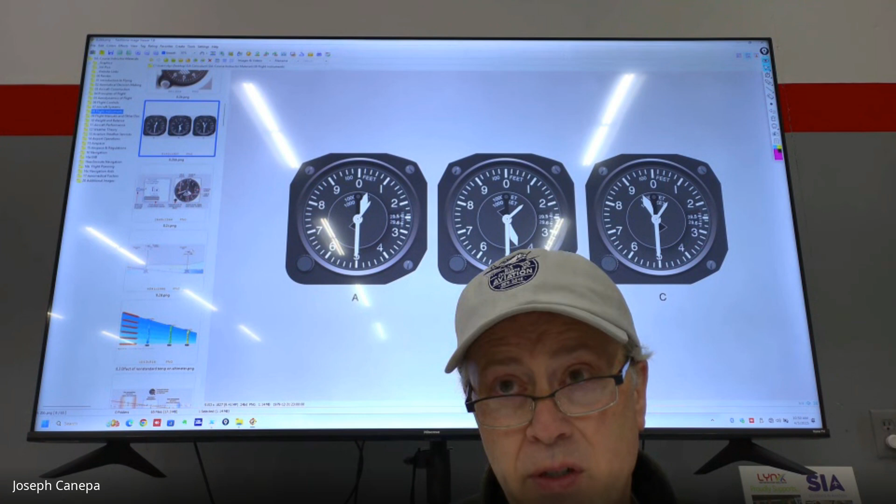Because the ocean is rising and falling with tides, very, very small, not thousands of feet. Is there a set reference? It would be an average, the average mean sea level. So there's a typical average that they would use. So the whole idea is just to give us some reference, because otherwise we really don't know how high above the ground we are.

All right, let's see, vertical speed indicator. This one's a little different. It's very similar to the altimeter in the sense that it has the little aneroid wafers, it's got all the little mechanisms, but there's a difference here. Again, what drives this? Is it dynamic or static pressure? Static air pressure drives this. It's the outside ambient air pressure of the aircraft.

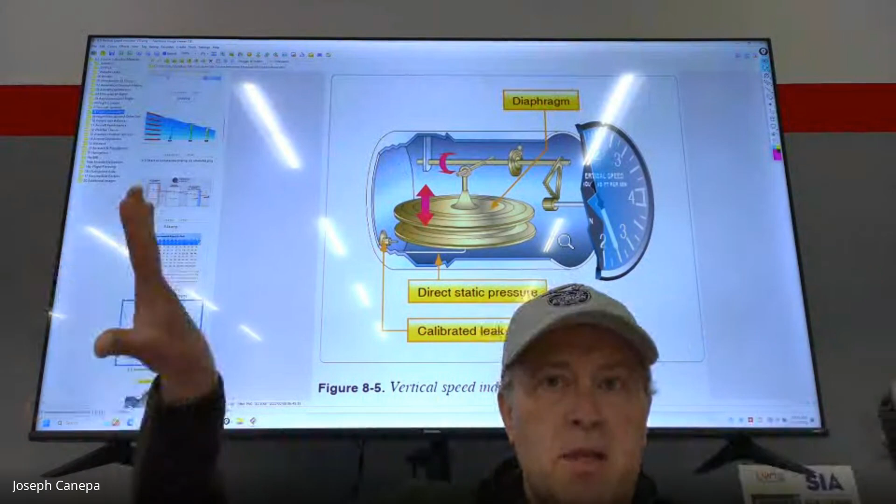So if the outside air pressure decreases, the air pressure in this cavity decreases as well, which causes this to expand or collapse. It's going to expand, right? So decreasing air pressure causes this to expand. But there's a difference here between that and the altimeter. The altimeter does not have this.

This is a calibrated leak right here. What happens is, let's say you change altitude - I climb up 500 feet per minute to 1,000 feet, okay? So I've changed to a different outside static air pressure. But because there's a calibrated leak here, this causes that needle to go back to zero again because it's leaking out, whereas in the altimeter, that's sealed off. There is no calibrated leak. That's how we can tell the rate of change in altitude. Does that kind of make sense?

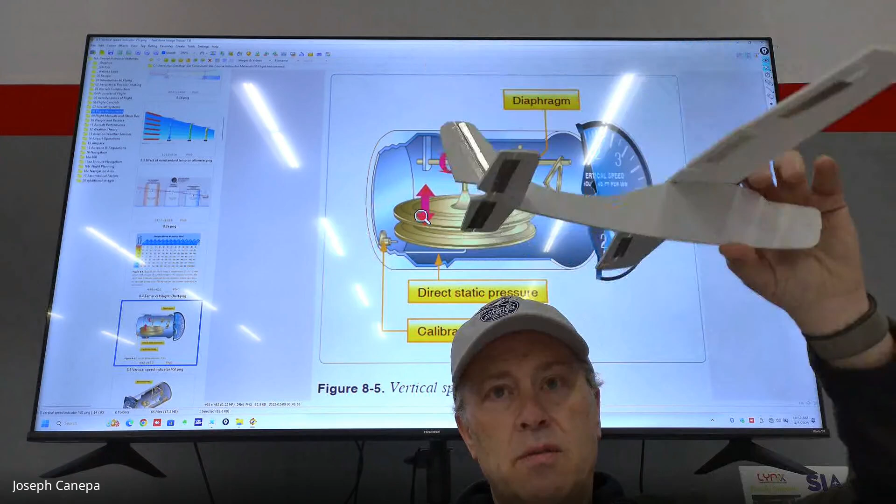Got it? Everybody's got it? Okay, again, the only difference there is that calibrated leak, and because it's calibrated, it's only going to let out a certain amount of air, and it'll always equalize with the air around it, whereas the altimeter is sealed from the outside air.

All airspeed indicators work on this same principle. Even the ones with technically advanced aircraft still use the same principle. They may have a different type of sensor - instead of an aneroid wafer, they may have a different type of solid state sensor, but they work on these same principles.

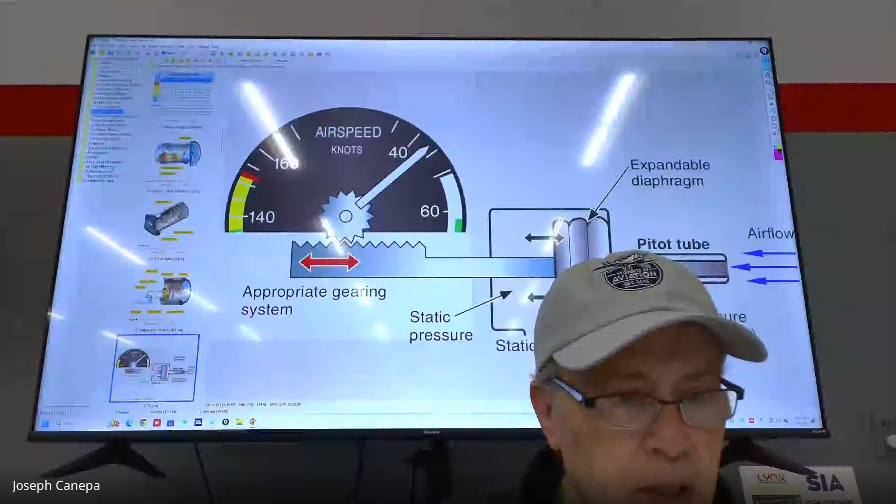So another thing you're going to see on your airspeed indicator, you're going to see various V speeds. Let's see if you guys can identify these. Let me just back out of here.

And that's for all aircraft, typically it's going to be like a landing configuration. You're going to have - well, what types of things will we want to use to come in for a landing? We obviously know we need to have gear, so if we've got retractable gear, we want to extend the gear, right? But what other things might we use when we come in for a landing? Flaps, yeah, we want to drop our flaps here on the aircraft.

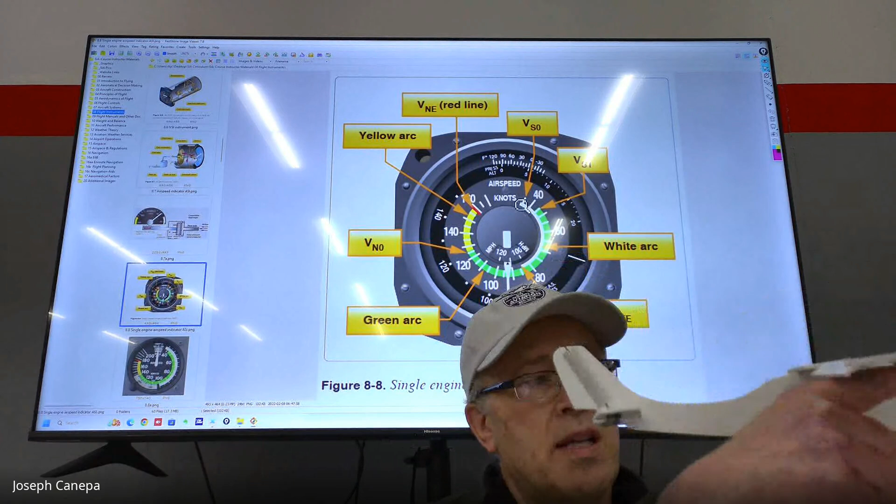So that increases our chord line. We learned about that early on. Our chord line has changed, our angle of attack has increased, and the surface area now is longer. We've got more surface area, more drag. So it changes our stall speed, and that gives us a little bit more margin. It actually lowers it quite a bit, and on this here, it lowers it by 10 knots, which is pretty significant.

Okay, so with the flaps out, we can stall the aircraft roughly at this. Obviously stall speed varies, but generally speaking, when you're coming in for a landing, the stall speed is going to be right around that 35 knot mark there.

That's VS0. Okay, then there's VS1. That stands for V, velocity. Whenever you think of these V speeds, think of them as velocities. So V stands for velocity, S stands for stall, and 1 stands for the clean configuration. We notice that's at the bottom of the green arc, with the flaps retracted. That's going to be your flaps retracted speed. And you may have other configuration speeds for more advanced, larger aircraft. They may have a VS2, VS3, or whatever, for various configurations of the aircraft that would change that.

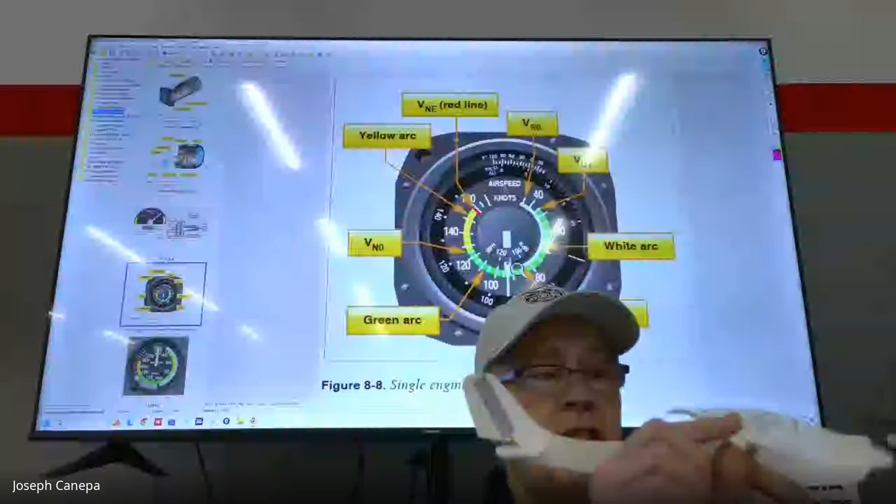Okay, VFE, does anybody want to take a guess at what that stands for? Maximum velocity for flaps extended, right? So what that means is we don't want to go past this speed with the flaps down. Otherwise, we're going to potentially damage the aircraft.

And you will see it on some aircraft, particularly on low wings. If you look at low wing aircraft, it's really easy to see when a pilot or somebody that has flown that aircraft has actually left the flaps down and flown beyond that speed, because you'll see little wrinkles in the skin.

Just imagine, if I'm coming in for a landing, we're nice and slow, there's not much stress on this flap right here. But if we go through the air super fast, say the airplane's only designed to fly at 120 knots, but we're flying it at 160 knots, there's a lot of lift being produced here, but also a lot of pressure on that flap, a lot of drag out there. What it does is it causes the whole flap assembly to push up and create wrinkles in the skin right here. So if you ever see an aircraft with wrinkles in this area, you'll know that somebody overstressed the aircraft.

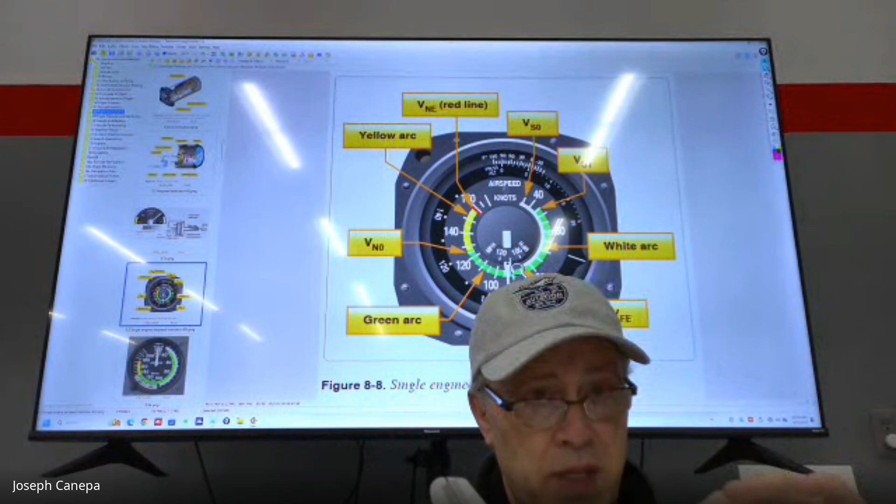It probably would still fly fine, but there could be some damage in there. So again, the whole idea here is we don't want to have the flaps extended above this airspeed, the VFE, flap extension speed. Okay, that's VFE, flap extension.

Did you have another comment? I just remember actually seeing that our instructor had like multiple sets of flaps that broke or snapped off from people. Yeah, it does happen. And again, it's very expensive. You don't want to fly.

Now, some aircraft, like the twin I have, I can actually go above the white arc with limited flaps. So I can't have full flaps above the white arc, but I can extend like 5 degrees of flap, maybe 10 degrees on the aircraft there, without damaging it up to a certain airspeed. I never do it because I just don't want to put the strain on the plane. But once it's in the white arc, then you can drop your flaps. You can drop full flaps on the top of the white arc.

You shouldn't, yeah. But I mean, there are situations where you may want to drop them at 100 knots. Let's say you're really close to the runway and you're going really fast. If it's your one chance to get down, there's a fire or something like that on board the aircraft, I'm going to do whatever I can. I don't care about the flaps at that point. But generally speaking, in just normal flying, you should never, ever let that happen.

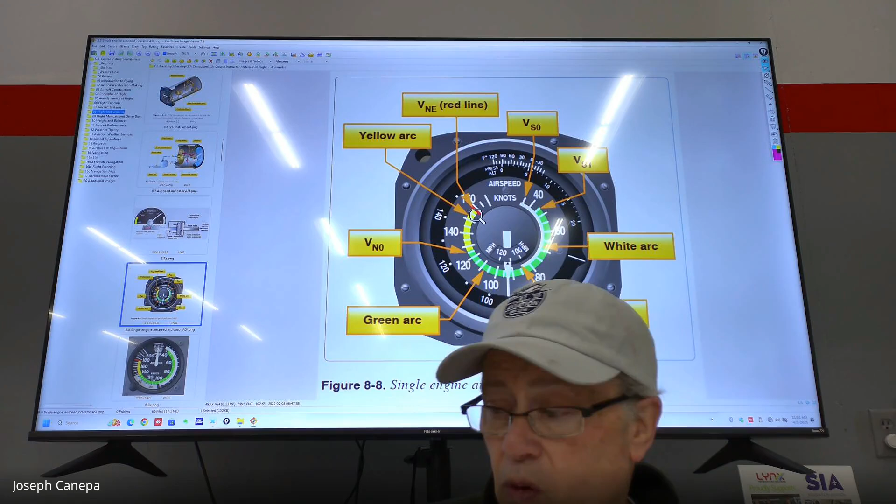The yellow arc is just a range of air speeds, bordered by the VNO, the normal operating top speed, and the VNE, the never exceed speed, which is the red radial line. That's the speed we should never go past, because when you travel above it, there's so much lift being produced that it's actually bending the wings up, and it may cause structural damage. So, any other questions there?

So the question was, if you broke the glass in the vertical speed indicator, would it affect the reading? The answer is it might vary slightly, but not by a lot. There's going to be some lag, because there's a Venturi effect sitting inside the cabin — you've got air moving fast on the outside, but still air on the inside. So the air pressure inside the plane is typically a little bit lower than outside the plane.

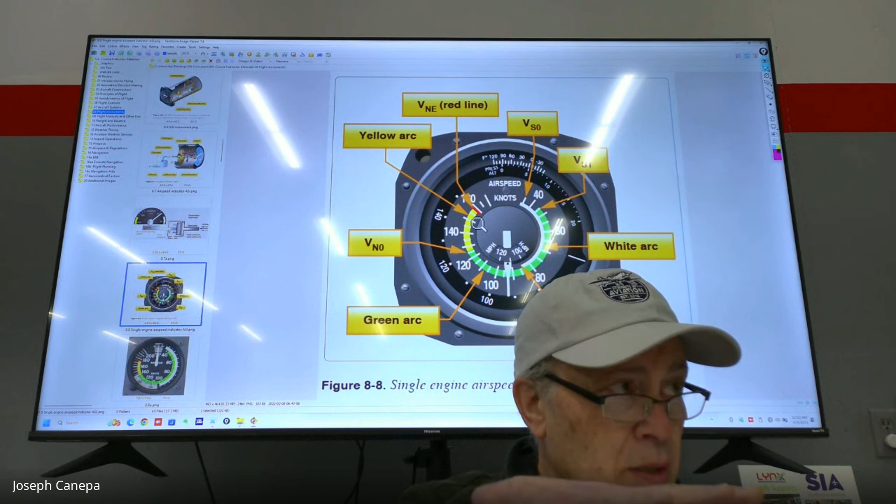But again, you could still break the glass in that vertical speed indicator and it would still work, as long as you didn't break the needle or something like that. In the cavity of the vertical speed indicator — what is this pressure reading? It's reading static pressure, whatever the static pressure is, either around the instrument or outside the plane. The pressure between the inside and outside of the plane isn't that much different, so it still should show relatively accurately.

Okay, typical airspeed indicator right here. Again, you should be very familiar with these different colors and what they represent. Normal operating range is the green arc. The flap operating range is the white arc. Yellow is turbulent air penetration speed, and the red line is your never exceed speed. Those you should just know.

Okay, there are a lot of other V-speeds here too. They call it the caution range — I call it the yellow arc. The book says caution range, but again it's the turbulent air penetration speed, also known as VA. Okay, let's go here.

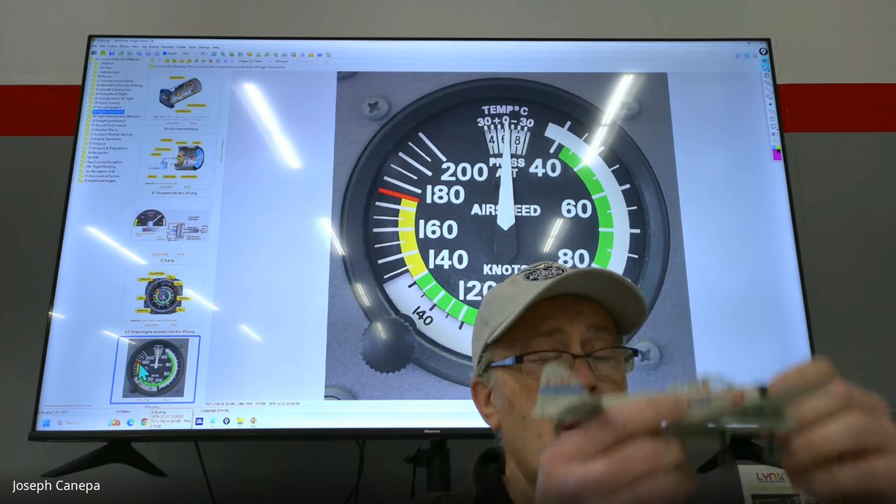Design maneuvering speed — this is a really hard one, so I'm going to try my best to explain it, but it's not something you're going to find on the airspeed indicator itself. The design maneuvering speed is the maximum speed, or the airspeed, that you can pull back on the control yoke without damaging the aircraft, without stressing it. So if your maneuvering speed is, let's say, 100 knots...

You should be able to pull back on the control yoke and the aircraft is going to stall before it does any damage to the aircraft. Again, if your maneuvering speed is 100 knots and you're flying at 100 knots and you pull back on the control yoke, the aircraft is going to stall before it gets damaged. Above that airspeed, if your maneuvering speed is 100 knots and you're traveling at 120 knots and you pull back on the control yoke, there's a good chance you're going to overstress the aircraft and either break a wing or a spar or something like that.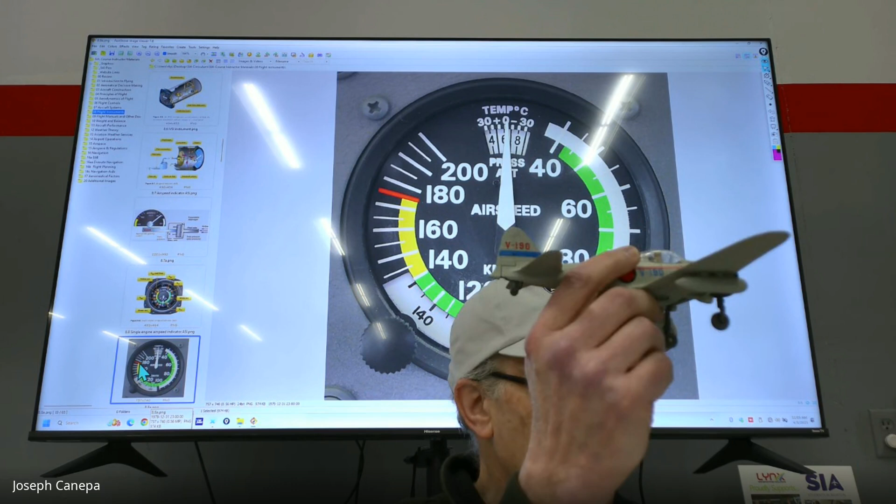So in turbulent air, we want to be flying at the design maneuvering speed, or the actual maneuvering speed for that aircraft. Keep in mind that the maneuvering speed for an aircraft changes based on the weight of the aircraft, density of the air, and things like that. Why is that? Let's get into it, because this is an important concept to understand. Let me throw out a question for you — think about it before you answer. The design maneuvering speed for this aircraft is 100 knots.

Let's say I'm flying and we can load this up. The maximum weight of this aircraft is 1,000 pounds, and we've got it loaded up with 1,000 pounds. It's now at 1,000 pounds.

If I'm flying along at 100 knots and we're at 1,000 pounds, I pull back on the control yoke. We know that at that airspeed, the maneuvering speed at 100 knots, the aircraft is going to stall before it breaks anything.

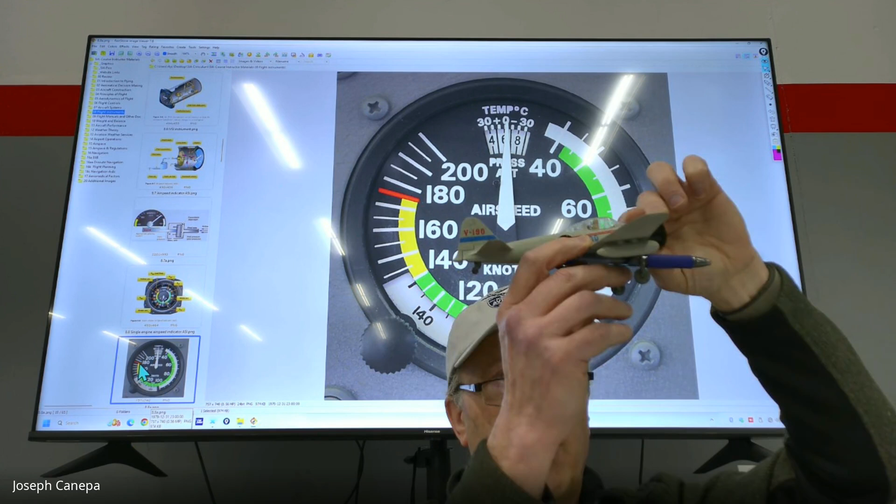Now, what if I take 500 pounds, or let's say 800 pounds off this, and we're now at 200 pounds of weight. We've got a light aircraft, and we're flying along at 100 knots, and we pull back abruptly. Would we exceed the maneuvering speed?

Well, the maneuvering speed has changed now. This is the key part here. So let's look at it. It all has to do with angle of attack.

Let's say the aircraft weighs, we're at 1,000 feet, the aircraft weighs 1,000 pounds, and I take weight out of the aircraft. To maintain our altitude at 1,000 feet, what do I need to do with my angle of attack?

So what did I say? We actually added weight or took off weight? Took off weight. Decrease the angle of attack, because we don't need as much lift anymore. At 1,000 pounds, we need a higher angle of attack because we need more lift to maintain that altitude. But if we drop 500 pounds off that, we don't need that much angle of attack anymore, so we can drop the angle of attack down.

Now remember critical angle of attack? That was about roughly 16 to 20 degrees, somewhere around there. That's the point where the aircraft stalls.

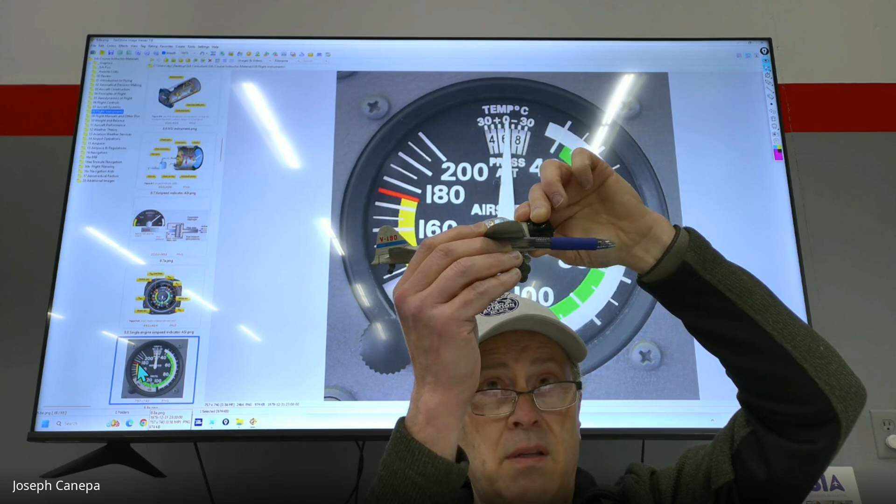When you're flying with a lighter aircraft, your maneuvering speed is actually going to be lower. Here's why: when you pull back on that yoke and you're flying at a higher airspeed, you're producing lots of lift, you're not going to hit that critical angle of attack in time enough to prevent it from damaging the structure of the wings.

That's why the maneuvering speed is going to change based on weight of the aircraft and things like that. The angle of attack is changing. So design maneuvering speed, I guess it's a tough concept to understand, but the design maneuvering speed again varies by how much weight you have in the aircraft. That's primarily what changes it.

If you have a heavy aircraft, you again have a higher angle of attack, like this, we have a higher angle of attack right there. And if I pull back suddenly, we're going to hit that stall angle of attack really quick, and the plane is going to stall before it damages it.

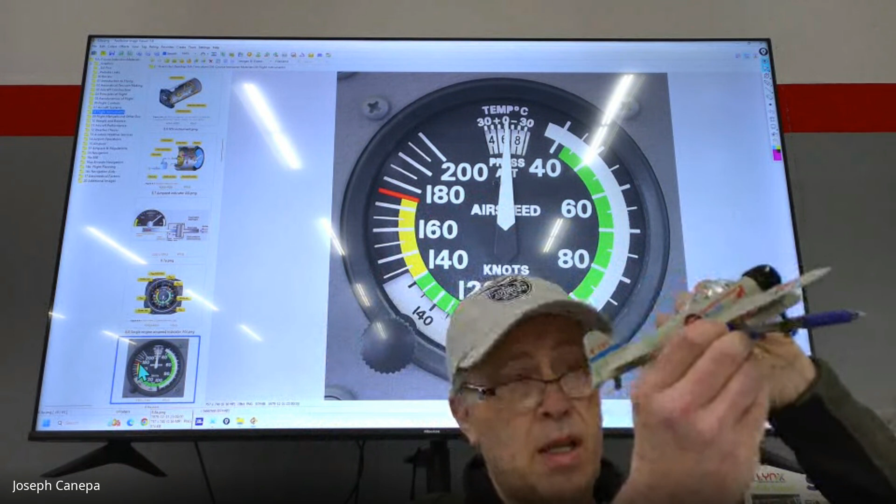If you have a very low angle of attack, with a light aircraft flying through the air, we've got all this extra angle of attack now. We've got lots of room to pull back on the control yoke and cause stress in the wings, which is going to change it. So the maneuvering speed of an aircraft does change with weight. You'll see that on the test, guaranteed.

Okay, let's see here. So let's talk about a couple other things.

Landing gear operating speed. This is on page 8-10. Landing gear operating speed has to do with the speed at which you can operate, the maximum speed at which you can operate the landing gear. So if in my plane it's 150 miles an hour...

I usually try to get underneath that airspeed to deploy, because it's hard on the structure of the aircraft and also the gear when you drop it. So if you are below that speed, it will be less stress and in compliance. Again, VLO stands for landing gear operating speed, which is the maximum speed for landing gear.

Landing gear extended speed is the maximum speed that you can have the gear extended, which sounds like it's the same thing as landing gear operating speed. But there is a difference. So let's read through it: VLO is the maximum speed for extending or retracting the landing gear, while VLE is the maximum speed at which the aircraft can be safely flown with the landing gear extended.

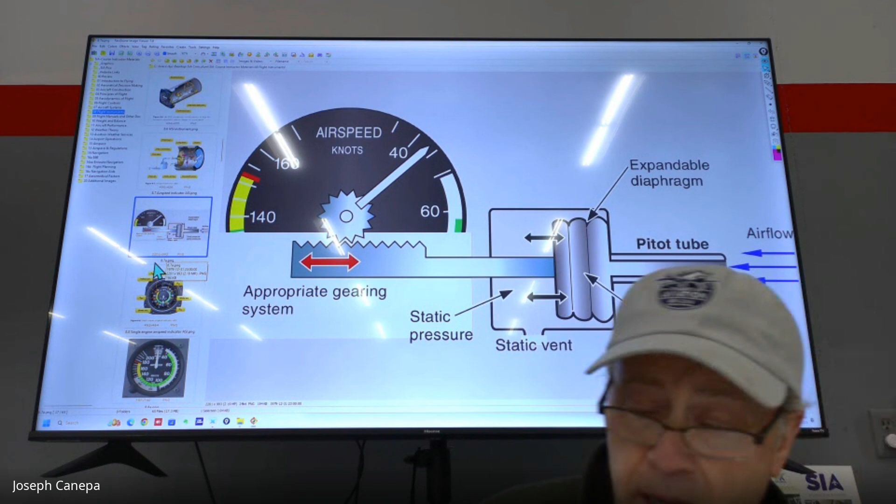There's a speed you can fly at safely that won't cause damage to the aircraft. All right, so the next two are super important: best angle of climb speed and best rate of climb speed. This is going to be easier to draw out, let's see if I can get a whiteboard on here.

There we go. They do have a diagram on here, but let's just draw. This is our surface right here, here's our plane right here. The best angle of climb, think of it as the best angle the plane can climb. So basically it's the most altitude for a given distance. It's the best altitude gain for a distance.

The best rate of climb is the fastest path to altitude for the same given amount of time. Let me see if I can do this better here. There's a way to draw this that, yeah, so let's do this here.

So our best angle right here, this is our best angle of climb. Again, this is our plane right here, and let's draw it here. Let's say this is just 2 miles right here, 2 miles. And then our best rate of climb, it's going to be a lot higher. So this is right here, it's the best rate of climb. Let's say the 2 miles here took us 10 minutes to climb, or that would make sense.

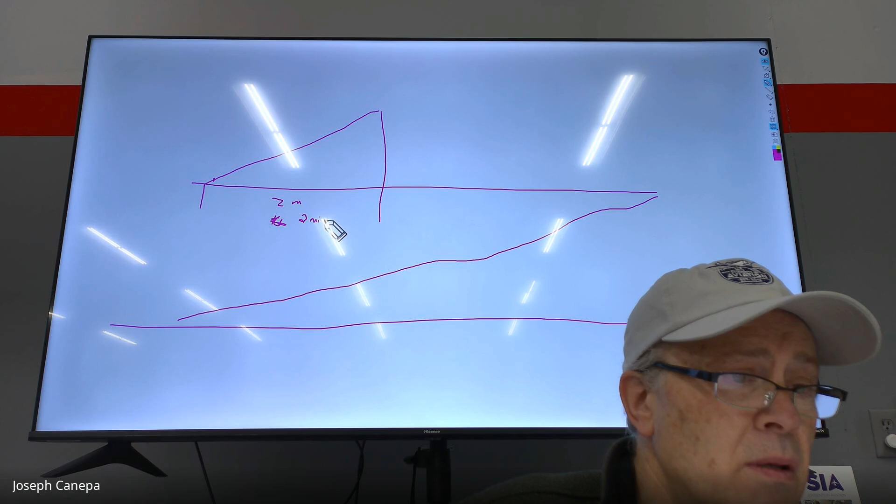So let's just say it maybe took us 2 minutes, 2 minutes here. Yeah, that's not, let's back up on that. So the best rate of climb is actually our best altitude gain for a given period of time. If this took us 2 minutes, in the same 2 minutes instead of climbing, let's say this was 1,000 feet right here for best angle of climb. This gets us 1,000 feet. For 2 minutes on our best rate of climb, may get us to 2,000 feet.

That's an extreme there, but let's just say, again, 2 minutes for best angle of climb. In that case, it's going to cover less distance there, but we're not going to gain as much altitude, it's just a short distance. Whereas best rate of climb, we're going to climb a lot faster for a given period of time. So if this is 2 minutes here, we may climb a lot higher, but we're also going to cover a lot more ground. This right here is like 2 miles, this may be 7, 8 miles here, this distance from here to here.

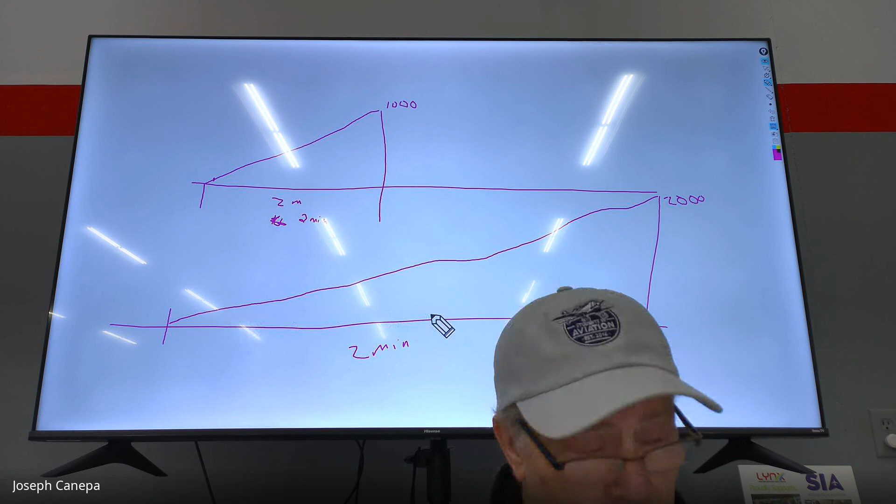So one is based on distance, that's the best angle of climb, and the other one is based on time. You're going to get your best rate of climb based on your... I'm trying to say here the distance traveled or the time used there. So 2 minutes for best rate, this is V...

VY, and notice that VY has only one angle. VX, that's your best angle of climb, it has lots of angles in it, X, it's got lots of angles there. That's the way to remember them, and you may come up with other memory aids for it. That's what I use.

So your velocity, best angle of climb, we use these all the time in performance calculations, so get familiar with those two. Actually all of these speeds, get comfortable with using all of those. Let's turn that off. And that talks about airspeed there, let's see where we're at.

Let's go over... yeah, there is on that 8-10. There's a single engine best rate of climb as well, that's for a multi-engine aircraft. You probably won't see that on the test because it's for multi-engine aircraft, but suffice it to say that VYSE stands for single engine best rate of climb, and conversely VXSE would be best angle with a single engine. Most of the training aircraft you're going to fly are all single engine, so it's not going to be applicable for most people training. So VMC, that's the minimum control speed for a multi-engine aircraft.

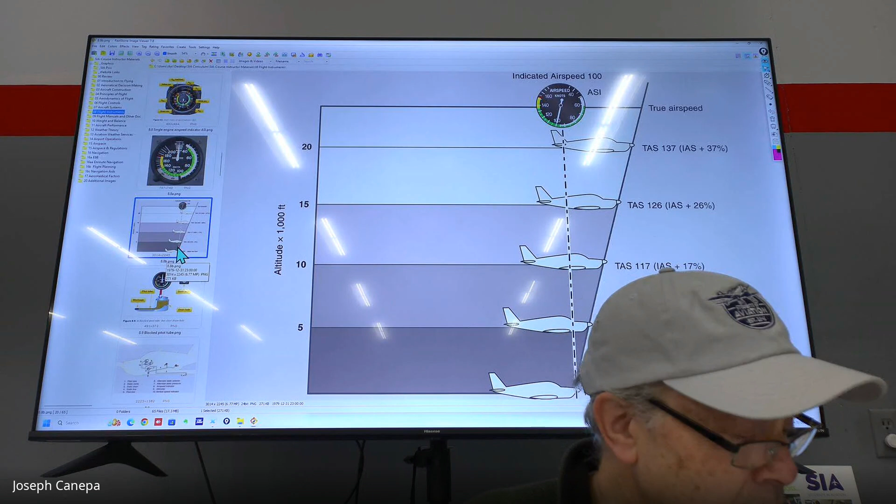Alright, so a couple things I want to talk about are blockages in the pitot-static system and how they affect the pitot-static ports. We can get into a lot of details, but definitely read the book on this. They've got some text in there that describes it probably better than I'm going to explain it here. Let's just read through this blockage of the pitot-static system.

A blocked pitot tube affects the accuracy of the airspeed indicator. That makes sense, right? The pitot tube drives... does it drive any other instruments? No, it doesn't drive any other instruments. The pitot tube only drives the airspeed indicator. It's the static port that drives all three of the pitot-static instruments.

So a blocked pitot tube affects the accuracy of the ASI, which stands for airspeed indicator. But a blockage of the static port not only affects the airspeed indicator, it also causes errors in the altimeter and the vertical speed indicator. So let's talk first about a blocked pitot-static system.

If the pitot tube becomes blocked and its associated drain hole remains clear, ram air is no longer able to enter the pitot system. So let's go back up to here. If there's a blockage right here, and the drain hole is open, we essentially have an altimeter effect, because we don't have any ram air getting pushed in there.

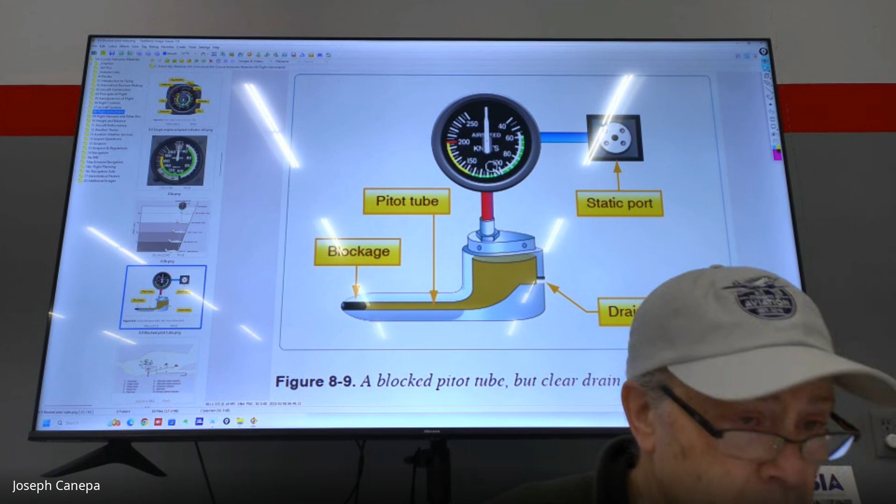Again, read through these different scenarios. You're probably going to see this on the test. They'll talk about blockages and what's going to happen to the airspeed indicator. So knowing which holes, like on the pitot tube and the static ports, and what they're doing helps with this. Let's go through here.

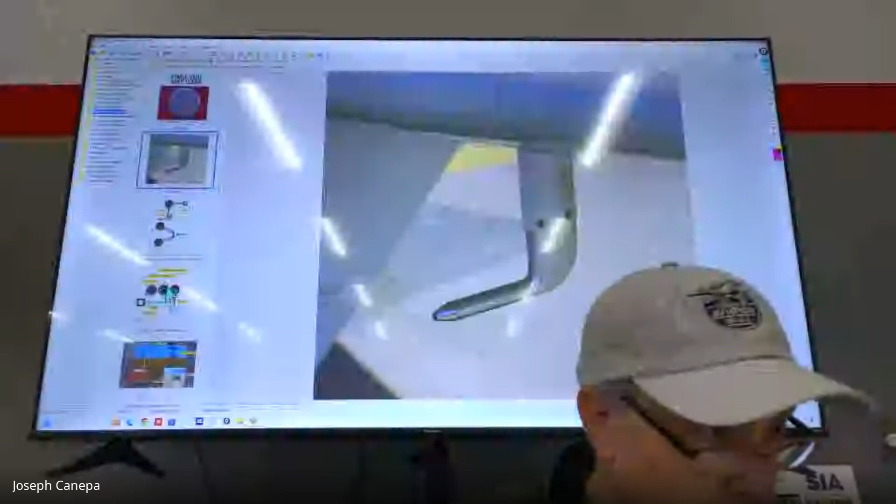Interesting. But a blocked static system is going to act differently as well. A blocked static system is going to change, obviously, as the air gets trapped inside. Let's see if I can go through here. Yeah, a blocked static system right here is going to affect all these instruments that have the blue line going to them, so every one of them is going to be affected. It's going to freeze the altimeter, you'll have just a straight constant indication on the VSI, and then obviously your airspeed indicator is going to have inaccurate readings there. That's again if you have your static blocked right there.